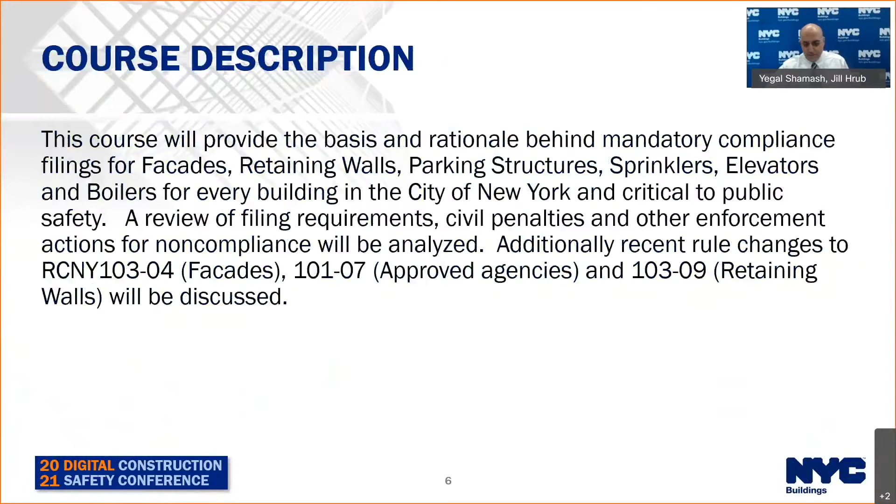Course description, everything that I just spoke about, learning objectives, and as I said, I'm going to start talking about facades.

A lot of you have heard me speak in the past about facades. For those of you who have been around for a while, you know facades as FISP, Local Law 10, or Local Law 10 of 1980 to be exact, or Local Law 11, Local Law 11 of 1998. In-house, we just refer to it as FISP, Facade Inspection Safety Program.

The staff we have in the FISP unit is really very specialized, and we have been trying very hard to retain professionals in the facade unit and hire inspectors with background specifically in facades. We go through a very specialized training regimen within the unit to make sure everybody has a specific baseline when it comes to understanding facades.

In cycle 9, we have about 16,000 buildings. For those who have heard me speak before, that's up from 14,500 in cycle 8. Every cycle we add new buildings to the universe, and that's where the additional 1,500 buildings have come into cycle 9.

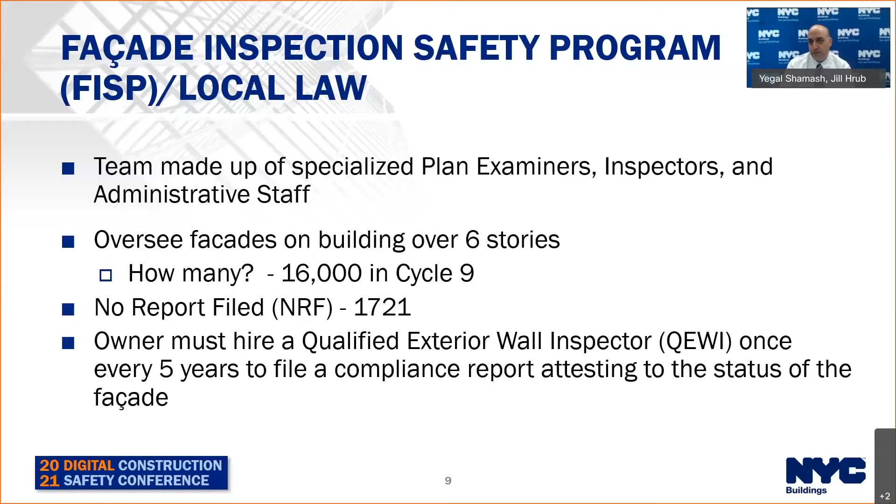So we'll go through a little bit of the history with regards to why we have this compliance reporting for facades. Often tragedies, unfortunately, lead to revisions to the rule or an expansion of DOB's enforcement capabilities. A lot of you are familiar with the history.

In 1979, unfortunately, a young college student, Grace Gold, got hit by a piece of terracotta and tragically passed away. Local Law 10 of 1980 got passed, and Cycle 1 started at that time.

Then Local Law 11 of '98 was a direct result of a collapse. Thankfully, no fatalities, but there's a video of this - you can Google it, and I believe Olga and Claudia showed the video in the FISP presentation earlier this week - of the collapse at 540 Madison.

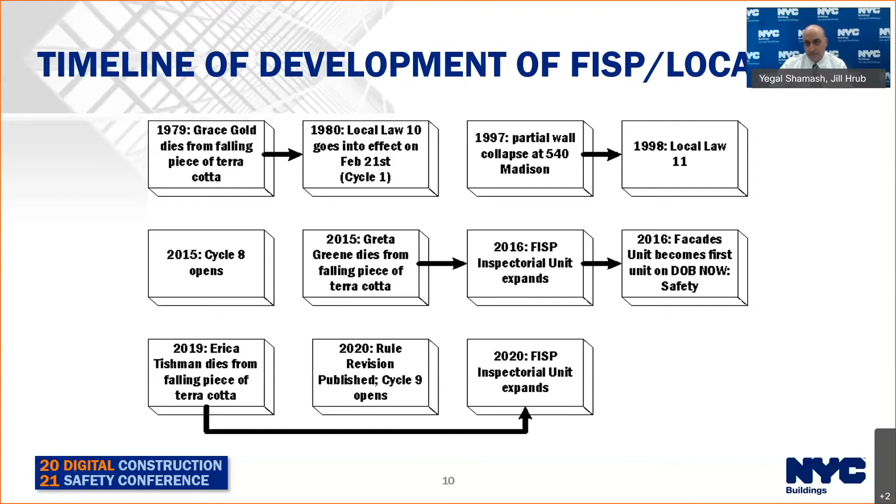So as I mentioned, buildings over 6 stories are included - 6 plus a basement, but not a cellar. Then we have the critical examination, which we'll get into in a minute. We have the 5-year cycle and the sub-cycles associated with that, the A's, B's, and C's, which are based on the block.

Section 101-07 covers approved agencies, and that specifically goes over the requirements on how to become a QE. 101-07 was also changed in 2020, which increased the number of relevant years of experience a QE must have, and that applies to new QEs. So all the old QEs are grandfathered in with their relevant experience and performance evaluations, but any new QEs must meet the new requirements.

One thing to note, though, is that we do list responsibilities of a QE, and that applies to new and old QEs. So everyone moving forward has to meet the new responsibilities.

One thing I'd like to point out is we have a great FAQ on our website now. It's been up for a little while, and we've modified it here and there based on additional questions the industry has been posing to us. We have some nice sketches about drop locations - we get a lot of questions about that. So please take a look at the FAQ.

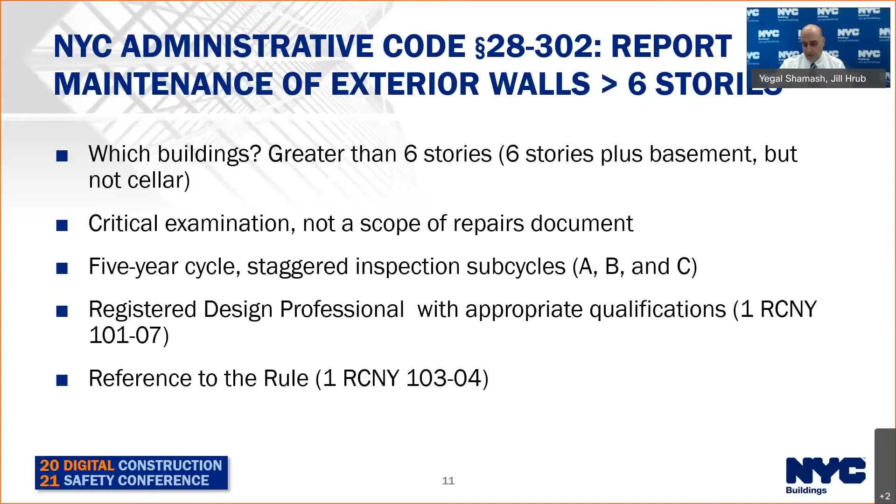So the critical examination, like I mentioned, is not just an inspection program. Obviously, the inspection is the primary part of the critical examination, but there are some things that you need to consider, and I'll say must consider, before you even do your inspections.

You have to review the previous FISP reports. You have to understand the maintenance history on the building. What were the previous reports saying about the building? Was it safe? Was it unsafe? And do a general history on the building: what type of permits, what type of alterations. If you have a good sense of the history on the building...

...it'll lead you to understand what type of inspections and where on the building. Do you need to do more than the minimum hands-on inspections? Do you need to target those hands-on inspections in specific areas of the building? Knowing the history on the building will allow you to not only do your inspections, but do them in a manner that will allow you to gain more information than just saying, I'm going to do the bare minimum number of drops.

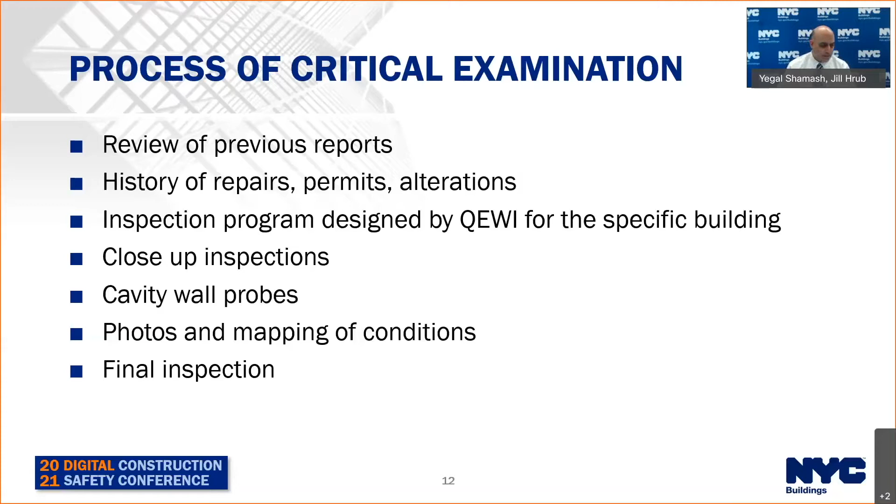And yes, the inspections are the key component of the critical examination, but then it's the follow-up: the photos and the mapping of the conditions, and we'll talk about mapping in a bit, and then it's the final inspection.

So, quick summary of the rule. The law for facades is 28-302. And specifically when it comes to unsafes, the law talks very specifically with regards to the reporting of the unsafes.

We need to be notified immediately of any unsafe condition that's observed, by owners or professionals. The repairs should begin right away, if possible, but certainly public protection needs to be installed right away. And the law says that the repairs need to be completed within 90 days, or if you can't complete that within 90 days, then you need to submit extensions.

So there are initial inspections, then initial extension requests, and then additional extension requests. And I have to point out that you have to make sure that you're submitting your extensions every 90 days if you have not completed your repairs and are ready to submit an amended report.

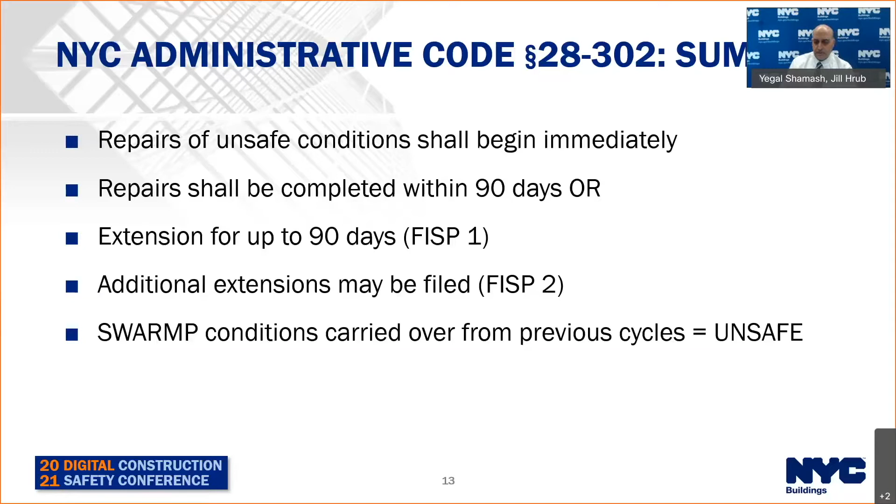So as I mentioned, unsafe conditions, you have to call it in right away, and that can be 311 or 911 if you think it's an emergency situation. You should certainly file the unsafe notification or the FISP3 form, and that can be done by any professional. You don't have to be a QE to file that, and you don't have to be affiliated with the building. That can be filed at any time. And then the extensions, and then the amended report.

Building owners are also required to report unsafe conditions by code, and then the public protection goes up. That has to be immediate. Make sure you're getting those extensions in every 90 days. That's important.

When we talk about public protection, we always see sidewalk sheds as the go-to. But you can fence or close off an area, that's also public protection. You can remove the unsafe condition, or you can net. So all of those are forms of public protection.

What leads to the public protection? Most of the time, not all the time, but it's an owner's lack of maintenance that leads to the public protection. Plain and simple. It's the owner that is causing the installation of the public protection.

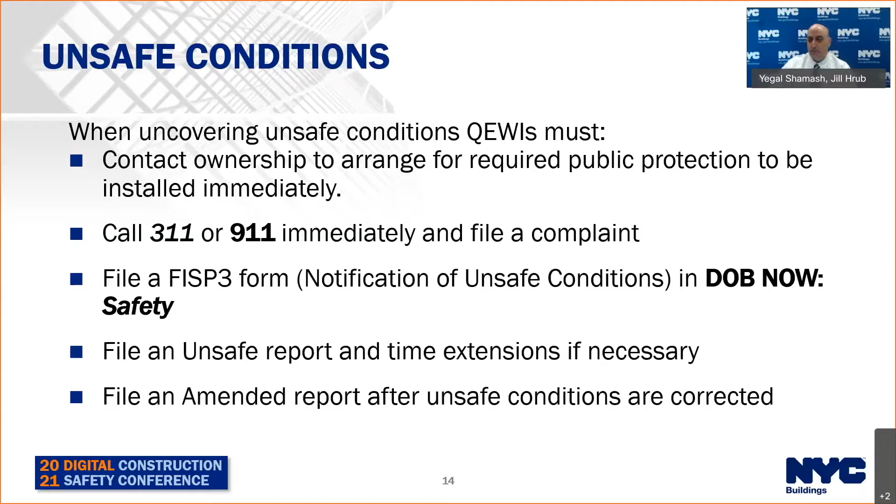So we'll go real quickly through the 3 different statuses a report can be filed. Safe, we like that. We like when a building is filed safe, as long as it truly is safe, first and foremost. Our inspectors, we now have 16 of them in the facades unit, and they are now inspecting safes and SWARMPs.

When I first joined the department, gosh, almost 7 years ago now, hard for me to actually believe I've been here 7 years. But we did very few safe and SWARMP inspections when I first started, and we realized, unfortunately, that sometimes we just can't take these reports for granted, and maybe the safe is not necessarily safe.

But the expectation with safe is that basically no repairs are going to need to happen on that building for a minimum of 5 years into the next cycle. Is it possible that some maintenance needs to happen? Sure, that's certainly a possibility, but no repairs. It's 5+ years that's the expectation.

SWARMP to us, or Safe with a Repair and Maintenance Program, yet another acronym that we like to throw out there in the facade world, is in our mind a precursor for a facade repair program.

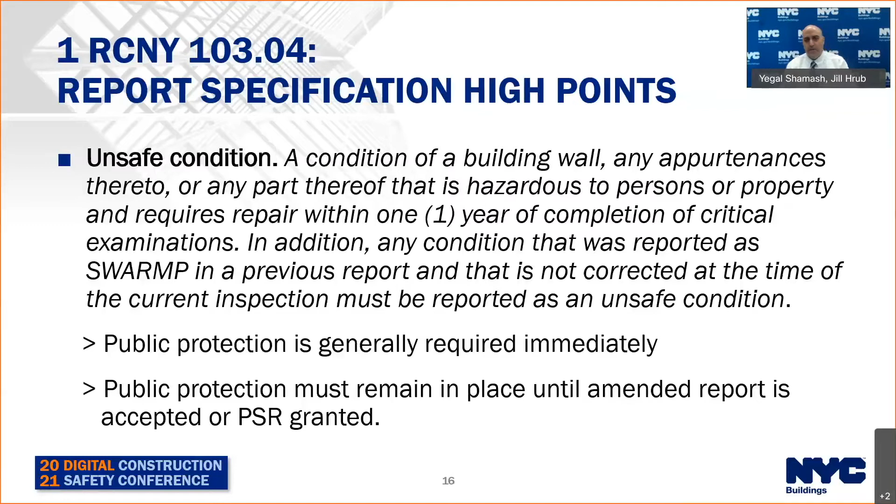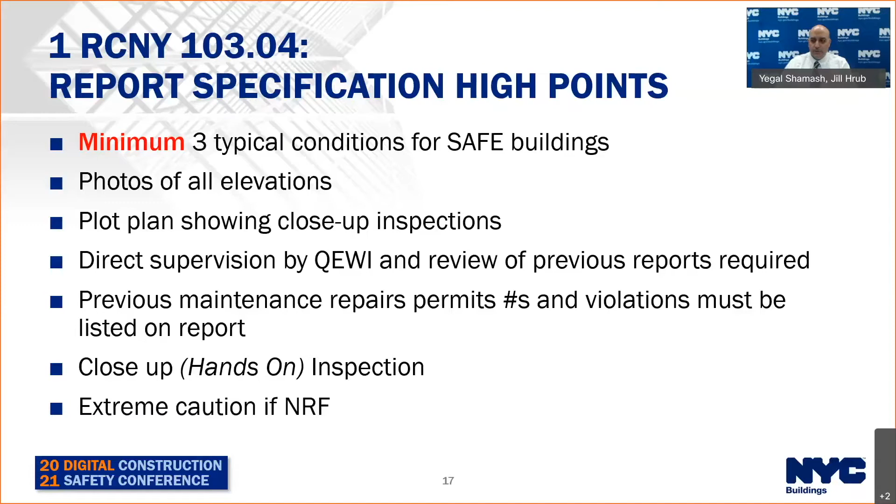So we'll get into the reports themselves, and some highlights of the reports listed there. The QE can do the inspections themselves, or they can have somebody delegate that on their end, but they always have to supervise the work. The expectation is that the QE is ultimately responsible for the report and what's in it, most importantly, and that's critical for us. So the rule does allow for the QE to delegate the inspections, but at the end of the day, the QE is the one signing and sealing the report, and those are the folks we're going to hold responsible for the reports.

Now we'll get into the rule revisions we had in 2020, and there were a lot of them. We're just going to highlight the major ones, but please go through and read the rule yourself. It's pretty dense and has a lot of information.

And why did we make the rule changes? I mentioned it before - there was a fatality on the Upper West Side, and then one in Times Square. And we said, well, we need to raise the bar on the minimum standards for both owners and professionals. So a lot of people think we were just raising the bar on the reports, but it's not just that. The expectations from owners, while not directly indicated in the report - a lot of the rule changes we made were very specific with regards to owners.

Plain and simply, we were trying to enhance public safety with the rule revisions. We're trying to push owners and professionals to make repairs that last multiple cycles. Many of the costs associated with doing facade work is just getting to the area to do the work. Again, we're talking about buildings over 6 stories, so we're talking about pipe scaffolding, hanging scaffolds. It's expensive to get to these locations to do this work, and then the general conditions associated with all of that - that is the majority of the costs for doing a lot of the work.

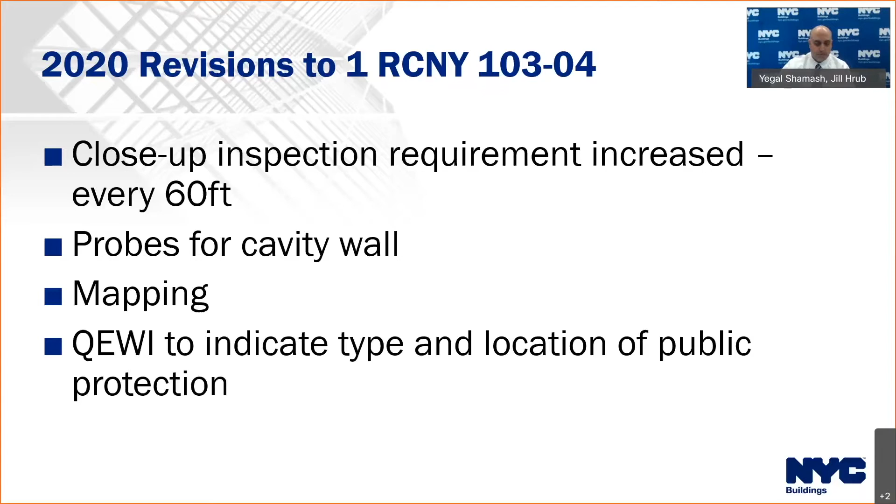So the biggest change, and I think most people will agree with this, is the requirement for the hands-on inspections. Not only did we specify an increase in the number of hands-on inspections and specify a specific distance, but previously the rule only had a drop along one street face. We changed that to fronting the public right of way.

And I know there's been a large amount of questions with what does that mean specifically, and we've discussed this numerous times. The public right of way for us is defined in the rule, and it's very specific - if I'm walking along the sidewalk and I can walk off the sidewalk onto either the private property or directly up to the facade, and walk up to that building elevation, that's the public right of way. I'm not associated with the building, and if I can walk right up to that facade, even if it's on private property, that's the public right of way for us.

It's important to understand that and make sure that the drops you outline with regards to the compliance reporting take that into account. Something we ask is that the drops are evenly distributed along the various elevations along the public right of way. I'll refer you to the FAQs again on our website - we have sketches of not-your-standard buildings that talk about what's public right of way, and talk about how you break up the 60 feet in terms of how you add up which elevations you need to add up, and how you can distribute those drops. So again, please take a look at the FAQs.

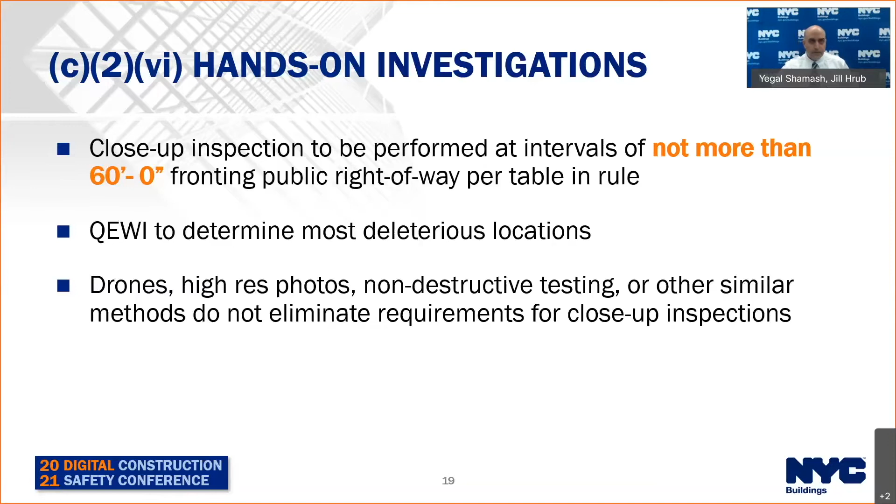And we talk about probes and cavity walls. And why did we require probes and cavity walls in the most recent rule change? We had numerous failures with cavity walls. Cavity wall construction, for those of you that are not familiar, became very, very popular post-World War II. Specifically in the late 50s, early 60s, it came to be the most commonly installed facade type in the city.

And if you heard me talk in the past, our top three issues were cavity walls, terracotta repairs, and glass. I hope everybody listened to Olga and Claudia's presentation from earlier in the week. Unfortunately, we're adding a fourth item to our list. We've had a rash of failures when it comes to EIFS, or EIFS, depending on how you like to pronounce that.

So we're looking at what we can do with all of these failures, and specifically in cavity walls, most of the failures stem from lack of ties or just the ties that were installed in the 50s and 60s have no protection. They were basic metal, no galvanization, no stainless steel, just carbon steel, and they're corroded right now. Right, they've lasted their lifespan has expired.

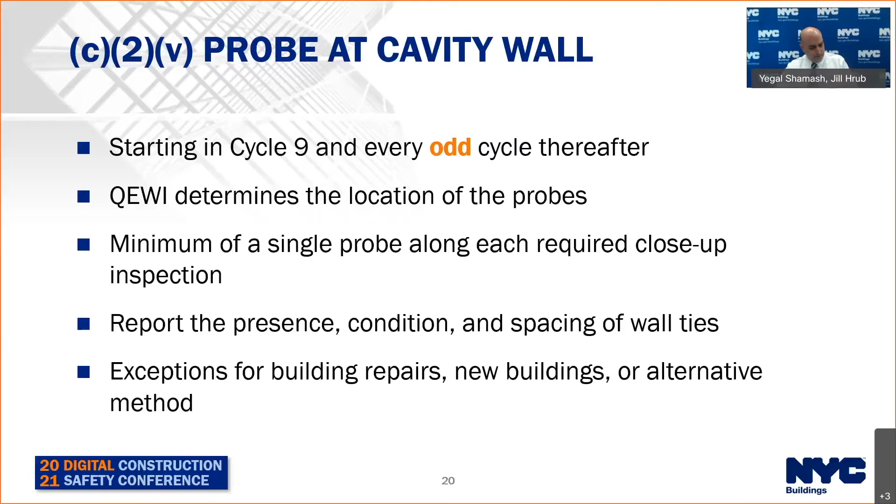And then do we need a permit for probes? So 1 RCNY 101-14 outlines permitting requirements, and most of the probes that we're talking about here would fall under minor work and don't require a permit. So please take a look at 101-14. It has very specific requirements on what needs a permit and what doesn't, and it should be fairly clear.

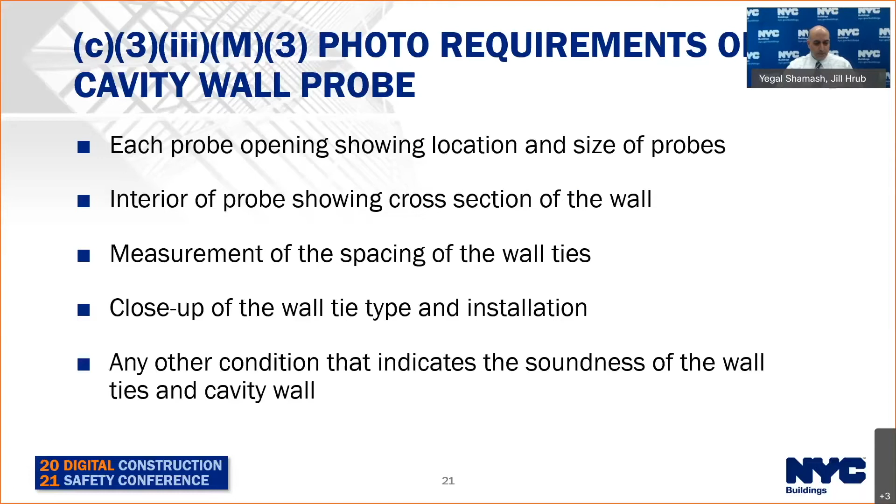Photo requirements of cavity wall probes. We want to make sure that we're getting the information in the reports and ensure that the probes are being done. And then mapping.

So I love the mapping picture that we always have, and if you notice, we changed it specifically for this Build Safe, Live Safe presentation. I was joking with Claudia and Olga that they took my 3D rendering away and put this one in, but this is also a fun picture that shows what we're talking about with the mapping. It's a one-word change that we made in the rule, but the expectation is that you document all the conditions that you observe during your inspections on an elevation, on marked up photographs, or a combination. We just want it to be clear where all the conditions observed are.

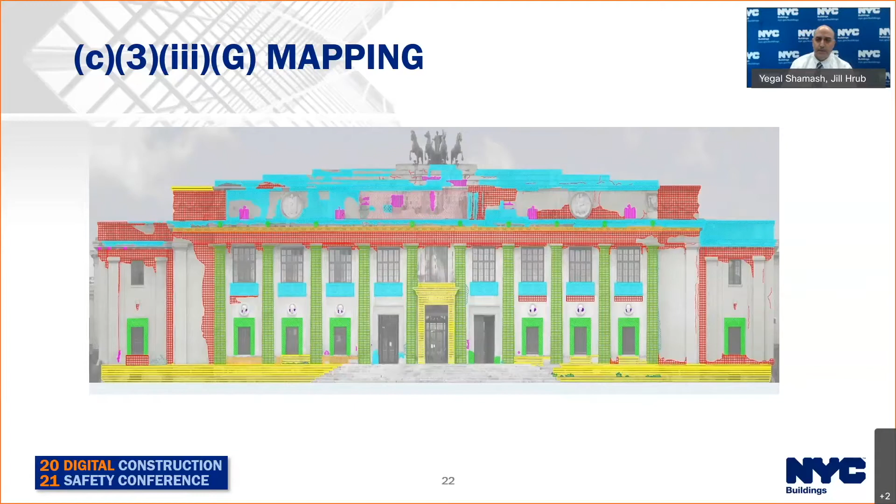For a multitude of reasons. Number one, so we know where all the conditions are. But when cycle 10 happens and we look back at the cycle 9 report, we can compare. You can compare, we can compare, and we can see what exactly has transpired.

Unsafe timeframes. Previously, we only had a requirement for SWARMP timeframes, and now we're asking for unsafe timeframes as well. This is in an effort to hopefully minimize public protection that's out there, limiting owners from filing unsafes repeatedly from cycle to cycle. Once that unsafe timeframe has expired, you will not be able to file extensions anymore, and civil penalties will start accruing. So it's very important that we take these unsafes very seriously and that owners do the repairs.

And what we're talking about with the repairs, as I mentioned before, and specifically we talk about this in the revised rule, is the repeated SWARMP conditions is a problem for us. Don't do the caulk repair. Fix the condition correctly the first time, because we're checking whether or not the SWARMP conditions are repeating from cycle to cycle.

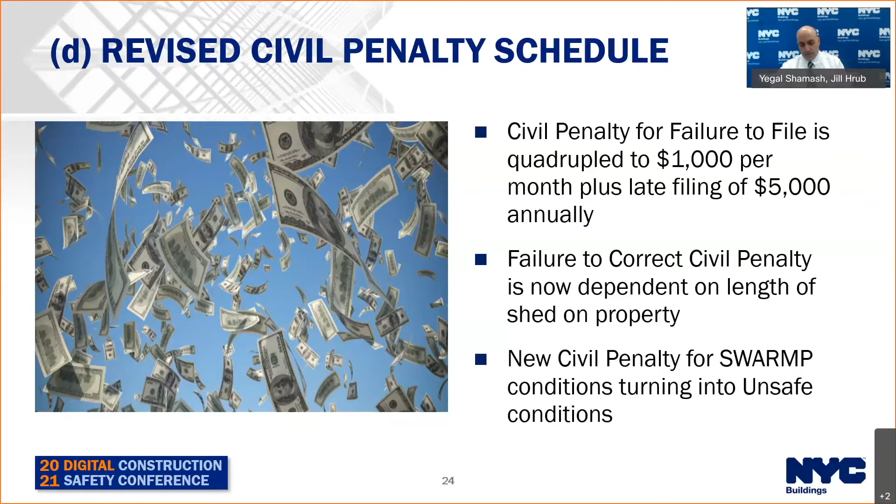And then the posting of the conditions certificate. This is all about making the condition of the building publicly available. It is on DOB Now, but specifically we want the tenants of the building to know exactly what the conditions of the building are. So we want those posted, and make sure that the conditions certificate, you go on there, you print them out, and make sure that it's posted right now.

There was some misunderstandings with the way the rule is written, but the way the rule is written is all buildings, whether you have filed your Cycle 9 report or not, need to have a condition certificate posted. And our inspectors are looking for those condition certificates, so please make sure you post those.

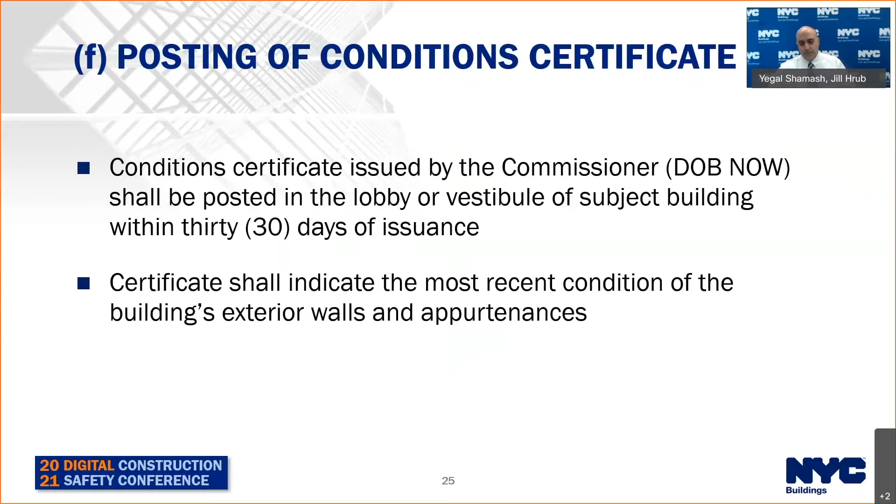Okay, so that's it for facades. I'm going to go on to sprinklers, and I'll spend a little bit less time on sprinklers, and then Jill will take over. You guys have heard me ramble on enough, so you can hear somebody else in a couple minutes here.

But sprinklers, and specifically Local Law 26 of 04. So the Department of Buildings convened a World Trade Center Building Code Task Force in March of 2002, and that was a direct result of the events of 9/11. That task force outlined a whole list of recommendations in early 2003, February 2003. And then our former mayor, Michael Bloomberg, on June 24th, 2004, signed the majority of those recommendations into law. And a lot of those, specifically 3 of those, became Local Law 26 of 2004. And one of those is the requirements for office buildings over 100 feet in height to have sprinklers.

And so yes, this law does go back to 2004. It's one of the few laws that is retroactive to all buildings. So most of the time when we pass a law, we specifically draw the line in the sand, and everything moving forward needs to comply with that law. That's not the case here. And the reason why this was given such a long time frame to come into compliance is because this is retroactive to all buildings. And we'll get into some specific exemptions and all that.

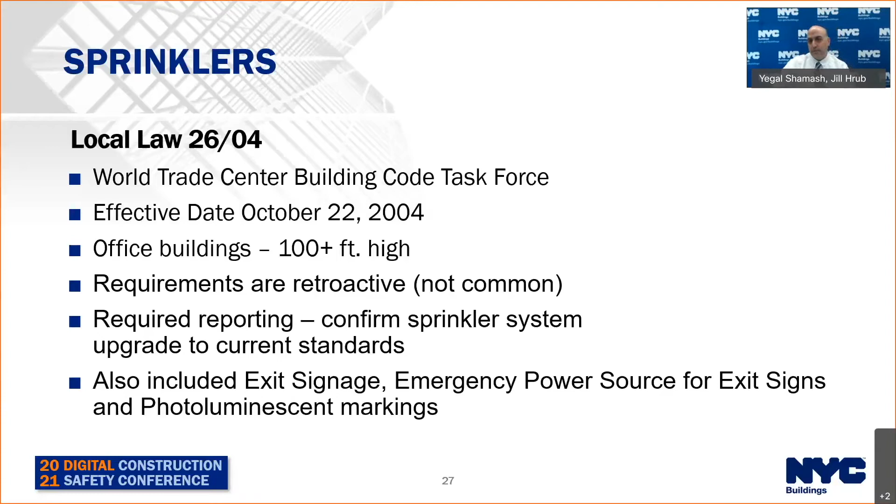And the sprinklers in office buildings, in my understanding, it's twofold. Number one, people in office buildings don't specifically know exactly where the egress pathways or the emergency exits are in buildings. You know, they're not specifically living in those buildings. And then office buildings can have a high number of people in them as compared to residential buildings.

So that local law added section 27-929.1 into the building code, into the '68 building code, which required, as I said, office buildings over 100 feet needing to be sprinklered.

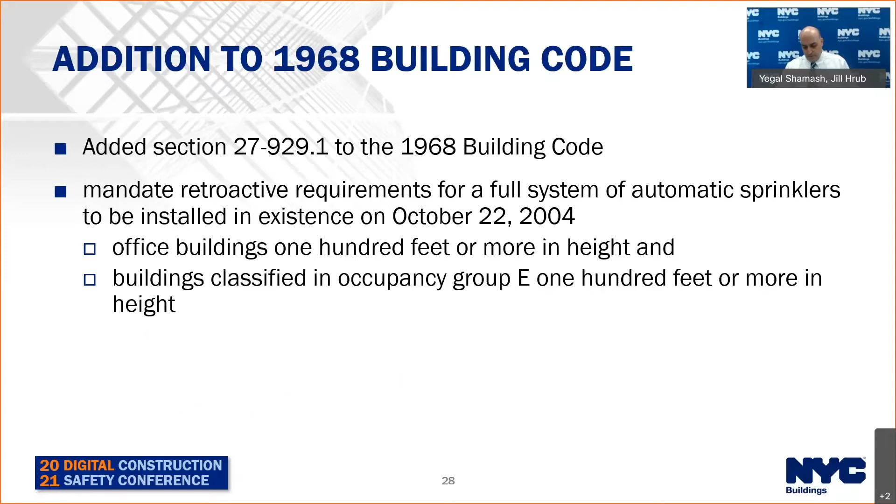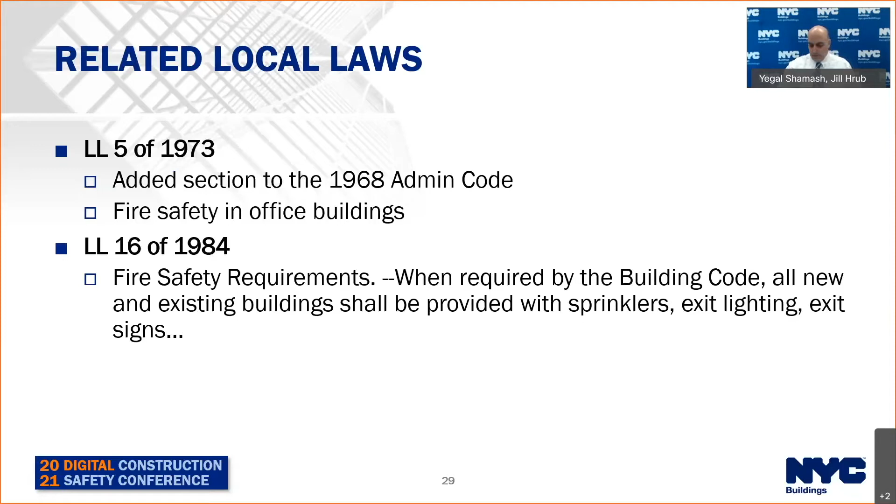Going back in time a little bit, there were two local laws prior to 2004 that were issued. Specifically, Local Law 16 of '84 required buildings to have sprinklers, exit lighting, and exit signs, and that was a line in the sand, as we like to call it, for a lot of office buildings.

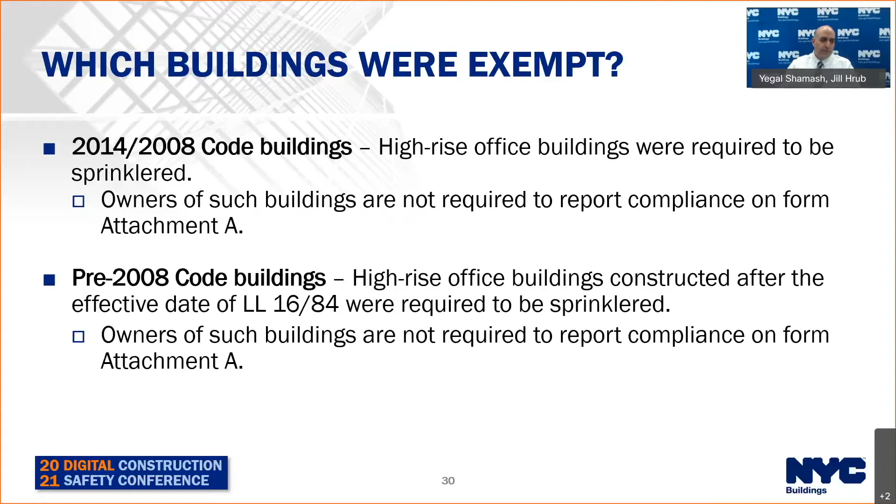So what buildings are exempt? I mentioned Local Law 16 of '84. Anything that was permitted after that local law, specifically high-rise office buildings, and continuing on in the 2008 and 2014 code, would have had sprinklers. It was a requirement since '84, and therefore any buildings permitted after that are exempt from the reporting requirements because we know they have sprinklers in them.

If a building was pre-1984 and had sprinklers installed and signed off before the effective date of the local law, then those buildings simply need to file what we refer to as Attachment A in terms of the reporting requirements.

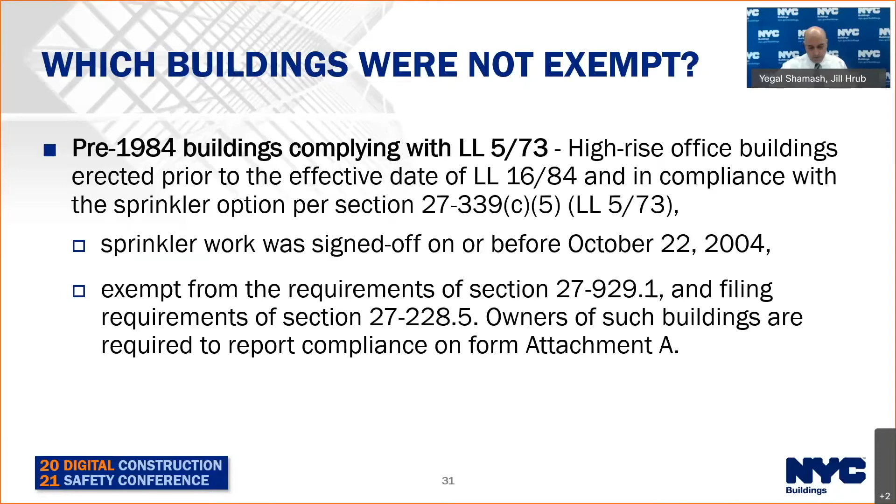One thing I'll note is the sprinkler page. You can simply go to the department's website and search for LL 26/04. We have a long list of FAQs on there, and there's a nice bulletin that we reference as well that goes through this very specifically with a nice flow chart. Please take a look at those FAQs.

Lastly, if the building was pre-'84 but did not elect to install sprinklers, those are the buildings that need to install their sprinklers and comply with the full reporting requirement of the new local law. One thing to note: extensions were eligible, but that has come and gone, so there are no more extensions allowed.

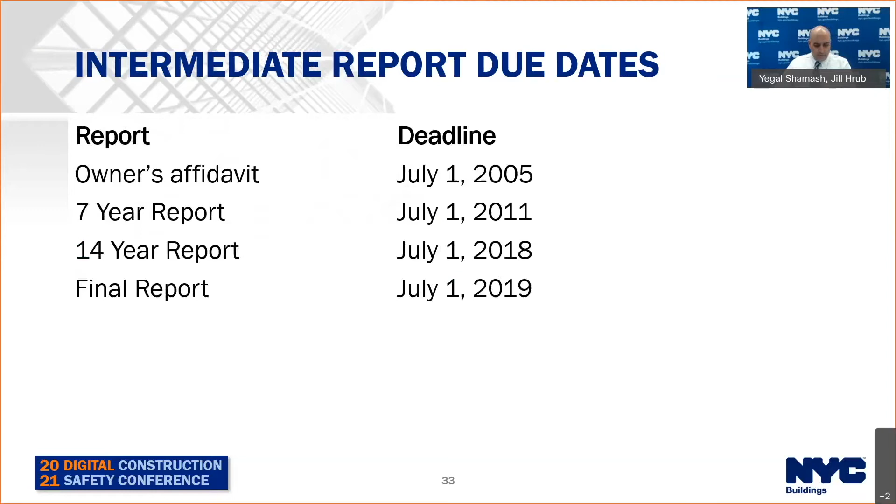This was started in 2004. We had three interim reports that were required, and then the final report. Here we are almost two years later, and the final report was due, and we still have 381 buildings that have not filed the report. So 17 years later, and two years past the deadline, we still have non-compliance and a large number of buildings that are non-compliant with this critical public safety issue.

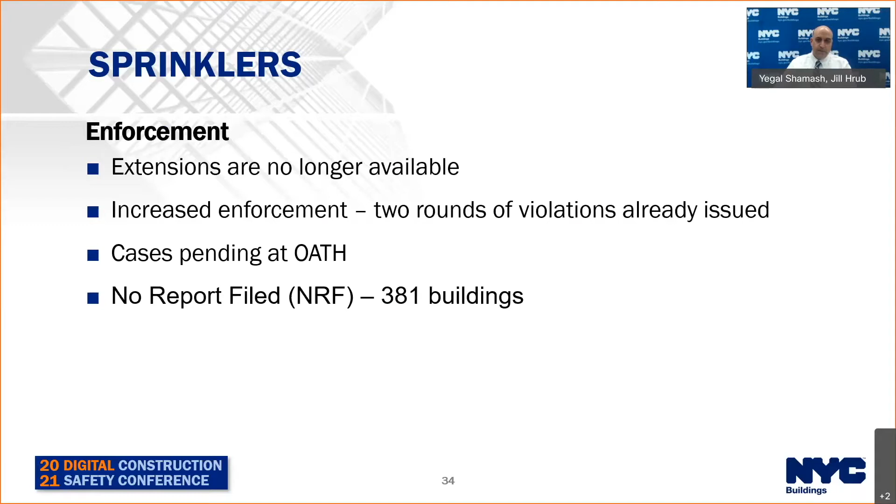So with everything today, please help us reach out to owners, to professionals, to everybody, so they're aware of these critical public safety compliance reporting issues, and let's make the city a better and safer place for everyone.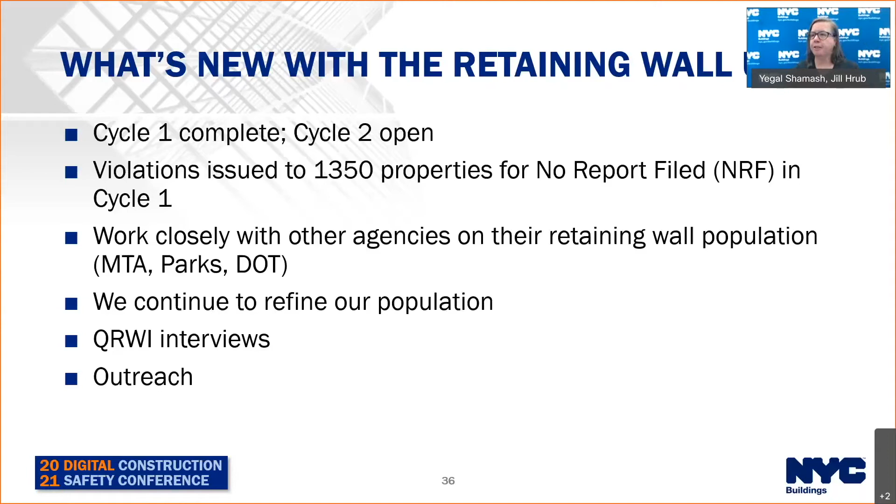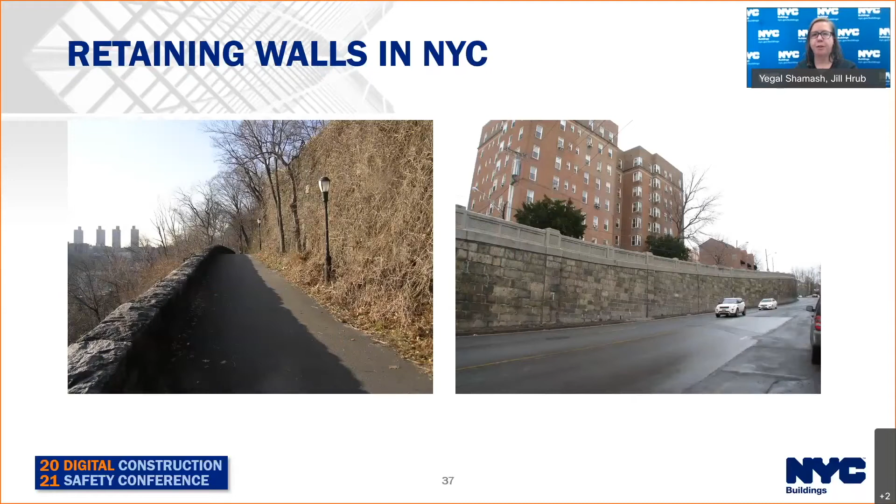So what are we talking about? These are some retaining walls. On the previous slide, we mentioned that we work with public agencies. A lot of these retaining walls are under the jurisdiction of other agencies - MTA, parks, DOT - and we are working with them as well. So it's not just the private owners we're working with, it's also the other public agencies.

And like I said, I'll go through this pretty quickly. History of code ownership: basically through 1855, 1916, there was this concept of who owns the wall. There's the high side, there's the low side. They both benefit, but somebody is causing it - if I decide to put my property on a lower space or a higher space, I need to put a wall.

And the ownership kind of changed over the years. And the reason why that's important is because, as you saw on the previous slides, we issue violations, right? Notice of violations saying that you have to file with us. So whose responsibility is it? That's why this ownership becomes an issue.

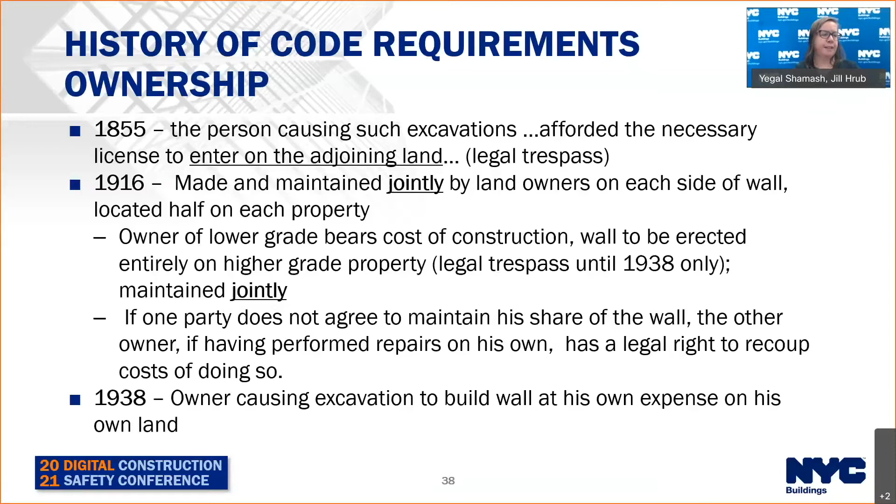I would recommend, if you think you are dealing with a retaining wall that needs to file with us, go over the ownership issues and see who's actually responsible.

Obviously, the maintenance and engineering has changed over the years as we've become more knowledgeable. It's gone from being very prescriptive, basically if you have a 4-foot high wall, you need a 1-foot minimum bottom, 20-foot high wall, 5-foot minimum at the base, to actually doing analysis with earthquake loads, lateral loads, sliding, overturning - more like, it's gone from prescriptive to engineering. But most of the walls we deal with do fall into this 1899, 1916 kind of era for the most part.

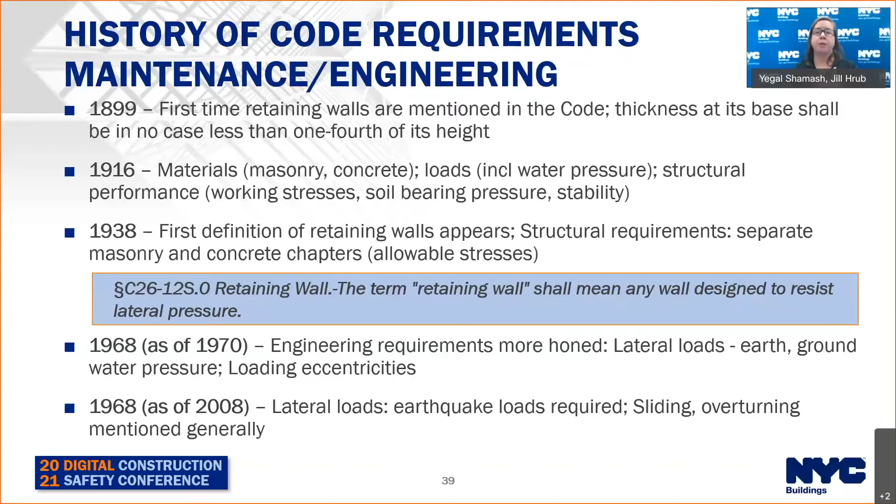As we always mention, if you've heard Yegal and I present, or anybody on our team, 301.1, just because you don't have to file with us does not mean that you don't have to maintain your building or your structure. And that's what I like to include with the retaining walls. We are the building department, but it does constitute structures as well. So all buildings and all parts thereof, and all structures, like a retaining wall, you need to maintain it safe.

So yeah, Local Law 37 came out in 2008. Again, 10 feet high, facing public right of way. Similar to FISP, you have to do it every 5 years with a qualified retaining wall inspector. You submit the report, we review it, we accept it, we reject it, depending on, because there's a minimum amount of things we want to see, which I'll go over in a bit.

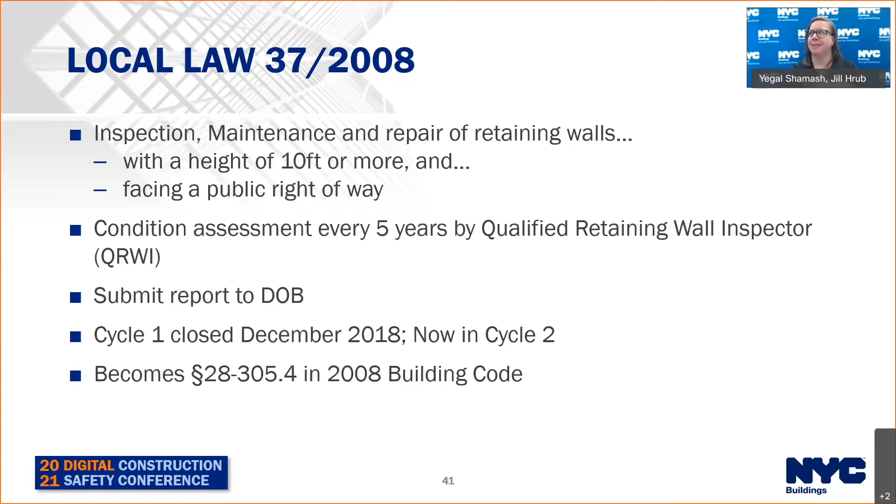And again, this local law, like what happens to a lot of local laws, it becomes folded into the building code. So this became section 28-305.4. I believe the third chapter of the administrative code is the compliance filings. You have 302, which is facades, 305 is retaining walls, 323, which I will talk about, which you don't know about yet because it's just being reviewed by these guys across the street at City Council and whatnot - now will be parking structures, which I'll talk about. And I believe Antonio's elevators and boilers also falls into chapter 3. So he'll talk about that.

So yeah, reporting requirements as promised. Again, similar to FISP, we want the general information, the property owner, property profile, how was the condition assessment performed, what was done, were there any probes done, what kind of calculations were done. We want to see a cross section. We want to know that the QRWI has done an adequate investigation and assessment. We want to see an analysis. We want to see numbers. What's the factor of safety?

It's again, similar to - you're going to hear me say this a lot - similar to FISP. FISP has been around for 41 years. Retaining walls, I guess 12 years now, 13 years. Parking structures is going to be new, but they do have similar underlying requirements.

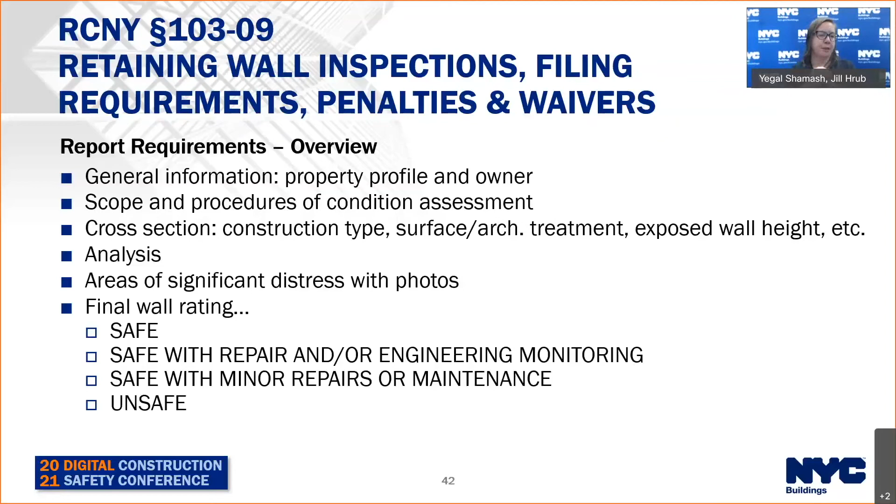So if there's areas of distress in the retaining wall, take photos of it. And then of course the final rating. You have your safe on one side, you have your unsafe on the other. And then with retaining walls, in between, we have safe with repair and or engineering monitoring, and safe with minor repairs or maintenance. So we kind of break it up into two categories. And I'll talk a little bit about the engineering monitoring later.

So here we are, safe with repair and engineering monitoring. What is a monitoring program? I don't know how many times we get letters saying, oh, we recommend monitoring. Okay, that's nice, what is that monitoring? What does that constitute? What does that consist of? Who is doing the monitoring? We want specifics, because we want to know that this is being thought about, that this wall is being addressed, especially if it falls into these sort of middle categories.

Stability analysis, as I mentioned, with the factor of safety. And especially, this is kind of crucial with these two categories, because we want to know what is that factor of safety that prevents it from being unsafe. It's pretty important. And then minor repairs or maintenance, what's the time frame? And then, again, similar to FISP, unacceptable time frames - ASAP, less than a year, immediately - because then that would be unsafe.

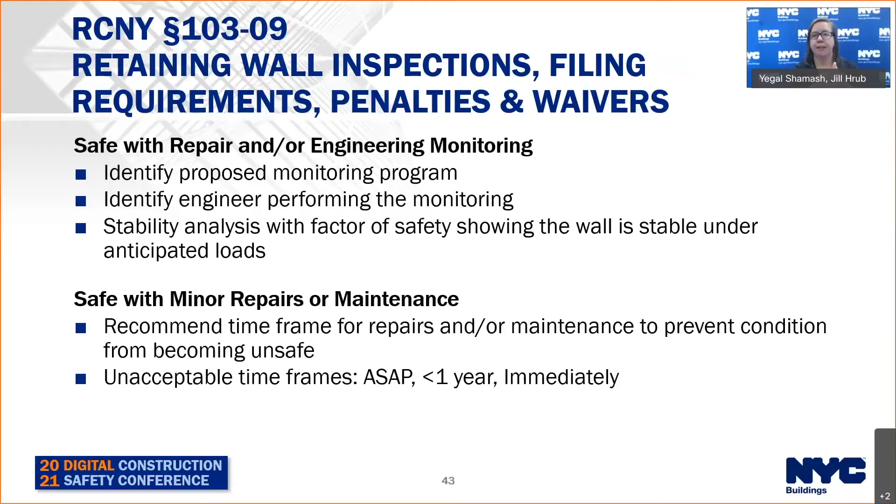If unsafe, the owner has to commence repairs immediately, or else at the very minimum take measures to protect the public. This could take the form of cordoning off certain areas, limiting access, building a construction fence, whatever, basically so people can't get to the collapse zone of this unsafe wall. Call 311, obviously if it's an incident, if something has actually already collapsed, call 911. But call 311 and then email us.

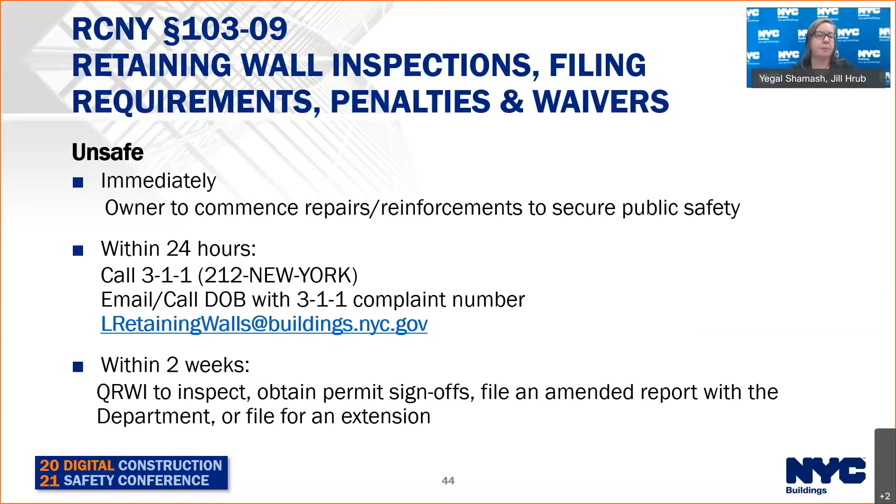You can see the email address is there. Within 2 weeks, get the QRWI to reinspect. And then once the permits are signed off, we realize not all repairs can be done in 2 weeks, but similarly, file for extensions, and then eventually file an amended report correcting that unsafe condition.

This is the form. What I'll briefly highlight, and again similar to FISP, two things here: there's two people that have to sign, the QRWI and the owner. Basically the QRWI is attesting that they have provided this report to the owner, and the owner is attesting to the fact that they have read the report and understand any required repairs.

This is very important for us, so this way an owner can't say to us, 'Oh, I didn't know.' They're literally signing their name saying that they've read the report. So this is important.

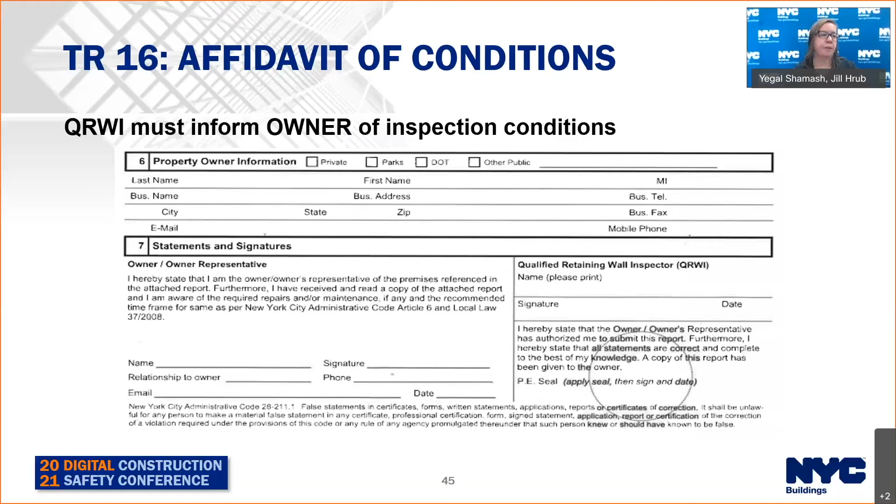Fee structure: initial, amended, extensions, fees attached with that. I don't think these have been updated recently, so these may go up. I don't know, don't quote me.

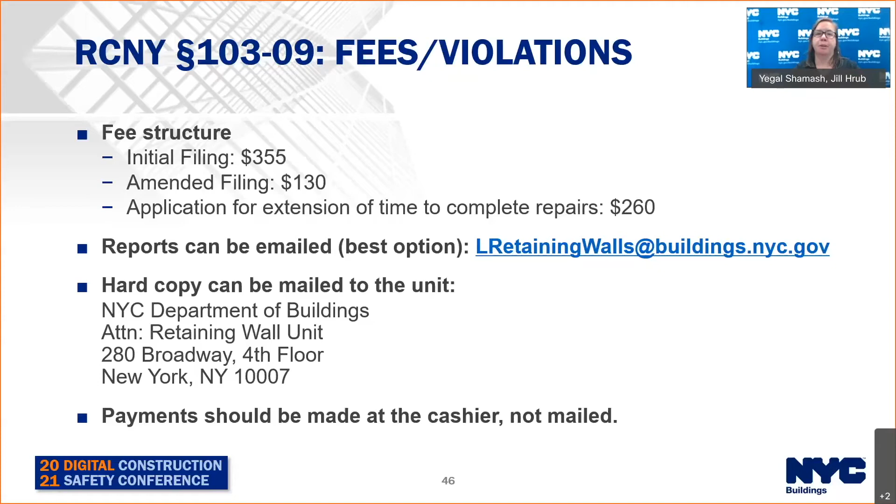And then, of course, we're not on DOB NOW yet. I don't know if that's good or bad news to you guys, but we're not on DOB NOW. Eventually we'll get there, I'm not sure what the time frame is on that, but we are accepting, obviously in these COVID times not in person, but you can email. We prefer the email, or you can mail it to us. But email is definitely preferred, and this email box is monitored by a few people pretty regularly, so it shouldn't get lost.

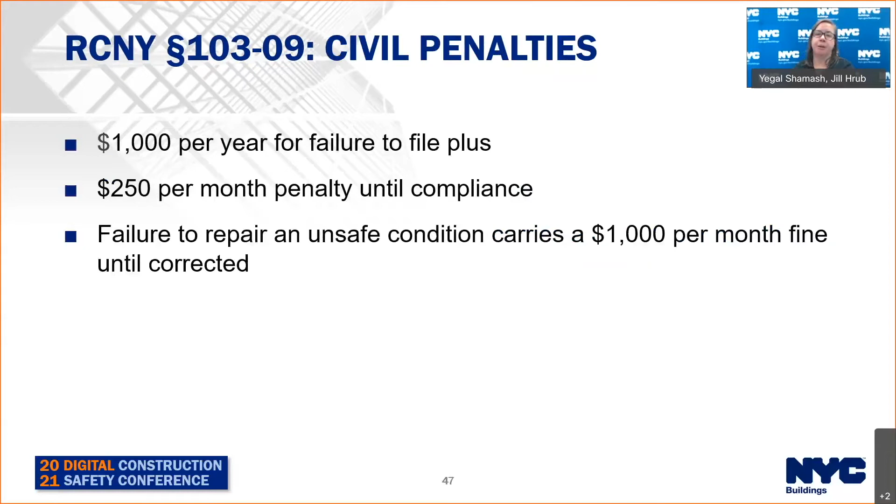Civil penalties again kind of mirror what the old facade penalties were: $1,000 per year for failure to file, $250 per month until compliance, and then failure to repair an unsafe condition, $1,000 per month.

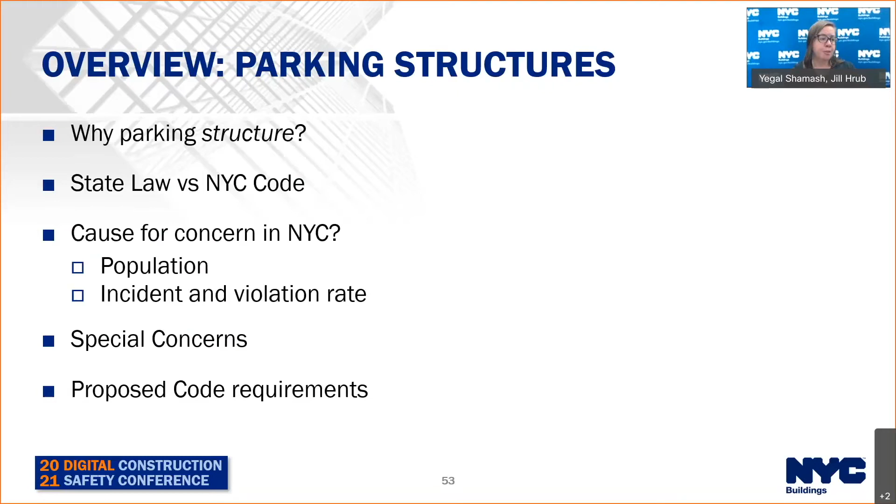And then we're going to go over the proposed code requirements and talk a little bit about the associated rule, because as you know, in FISP you have code 302, rule 10304 for retaining walls, code 305, rule 10309 for parking structures, code 323.

Rule 103-13, I believe, is what we're drafting. And I always put it that the code tells you what you have to do, the rule tells you how you should do it. So the code is you have to file a report with us. The rule is the report needs to have X number of photographs, so on and so forth.

The locations we're concerned with fall into different categories: detached, the basement of a residential building, sometimes on the roof, which can be hard to find. There are different materials here in New York City—a lot of reinforced concrete, that's kind of the standard, but some steel, and we've even had some wood parking structures. These materials degrade at a different rate, and they also degrade differently under a vehicle load than just an office or residential load, obviously.

How many levels? Ownership. Ownership is tricky because, again, with the commercial structures, often the parking structure will lease out from the building or the condo owner or whatever. So then it becomes whose responsibility is it? We've presented to ownership groups, and I think we're going to present to a group that represents the parking association or whatever. So that becomes—and this isn't as pertinent for the people on this call—but ownership issues can be tricky, shall we say.

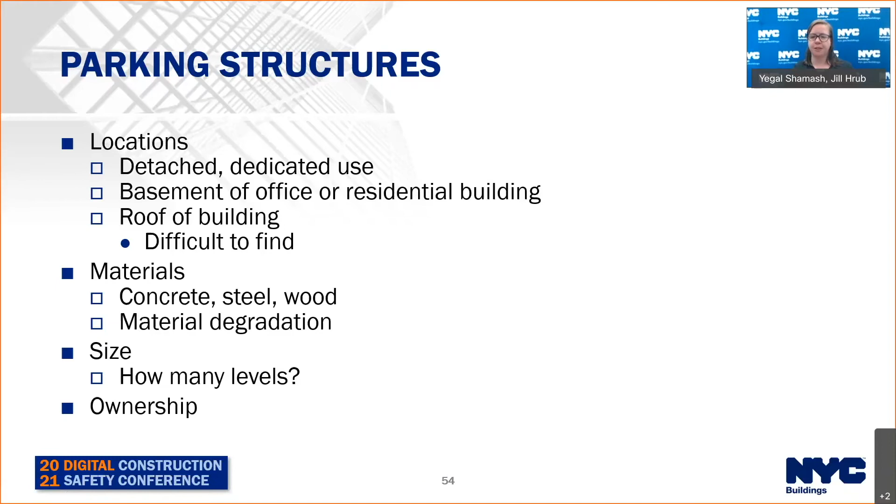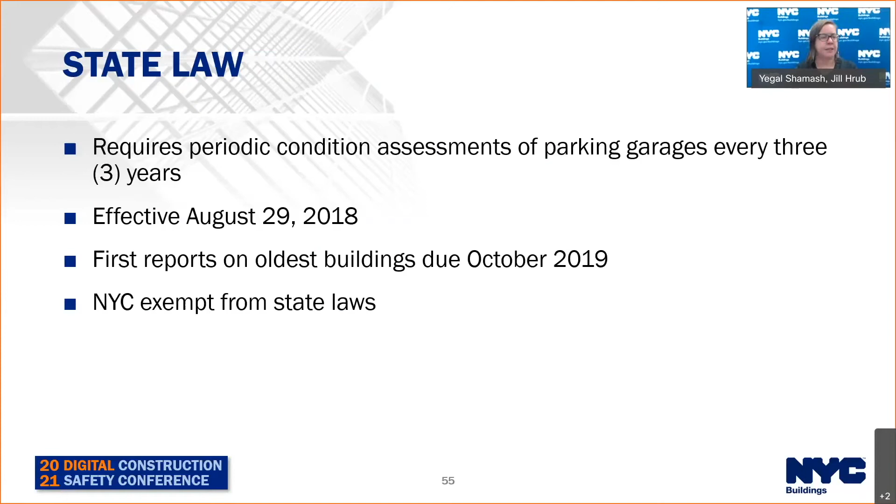So the state law, as I promised I'd talk more about it: periodic condition assessment every 3 years. It became effective about 3 years ago, 2.5 years ago. Again, oldest buildings had to be reported first. And now New York City is exempt from state laws—I'm never 100% clear on this, so don't quote me, but I think it's something like because we're over 1 million people, we have a little bit of autonomy to a certain extent. Obviously not completely, but we can kind of make our way.

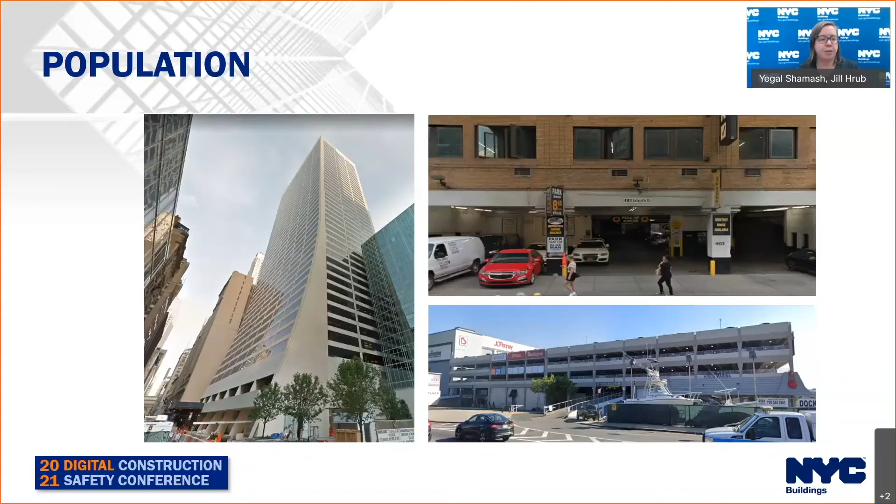If some of you eagle-eyed viewers may remember, I did this presentation, a similar presentation, at a couple different venues, and I said we had 2,100. Well, we're always finding new and creative ways to try and find our population, and we did that—we had our inspectors going out on sweeps related to COVID, and we said, hey, while you're out, why don't you let us know if you see any parking garages? And they did, so we added 700 more garages to our population, which is nice.

And this is our distribution, kind of as to be expected. Manhattan, lion's share. Brooklyn and Queens, similar. Bronx, not as much as Brooklyn and Queens, but still a lot. In Staten Island, we have 30. We may have more—we're still, like I said, always refining our population.

Structures not included: unenclosed, unattached—so basically a parking lot. And then 1 and 2 family parking structures, parking garages, you don't have to file with us, it's fine. But reminder, 28-301.1, you still have to maintain it in a safe condition.

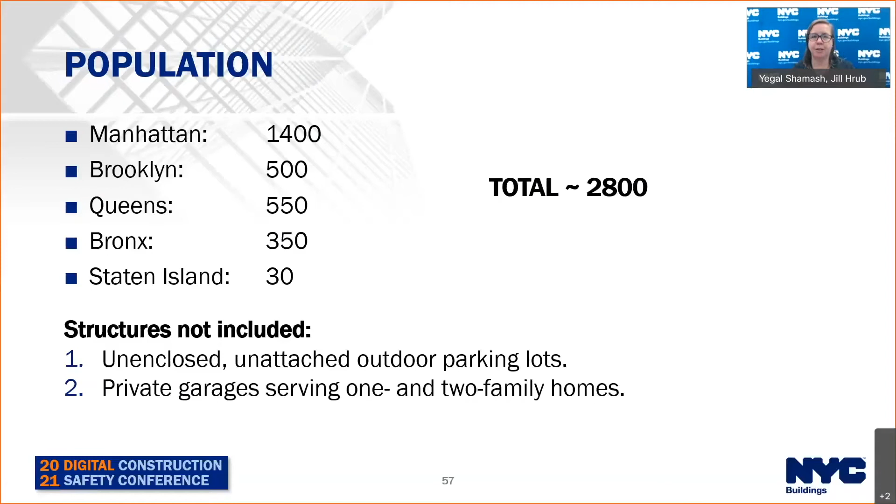Oh yeah, one thing I want to point out - the unenclosed, comma, unattached - that's an 'and,' meaning unenclosed and unattached. So if yours is unenclosed but attached, i.e. it's on a roof or something, it counts. Or if it's enclosed but unattached, it still counts, right? So it's the unenclosed, unattached that is a parking lot, basically. Yes, thank you, you all just confirmed. As soon as I started talking I was like, I'm going to get myself in trouble here.

He bails me out as per usual. So yeah, so what is our distribution?

We ran the numbers, and as of now - this could change as we get more information - but we think this is pretty robust at this point. So you can see they're mostly residential, about 2/3 residential, elevator apartments and other residential. And then garage, standalone garage, 14%.

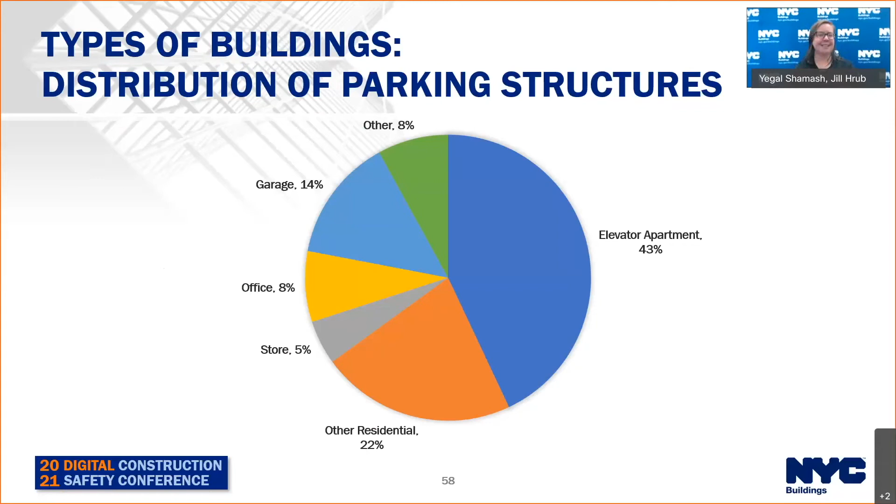Offices, not as many as I was expecting, but still, like with FISP - there's 1.1 million buildings, and you ask people who didn't see Gall's presentation how many FISP buildings there are, like 'oh, 100,000.' It's like, no, it's only 16,000. So, you know, New York - it's a wily creature, shall we say?

Okay, so now the next thing. We have 2,800 structures, right? State law says you have to do this thing.

Is this a problem? As I said, our parking structures are a little different than those upstate. So how do we do it? First we took our population, then said okay, how many class 1 violations do we get per year? We crunch those numbers, we get 10. Okay, well that's not a lot.

But we receive 60 complaints a year. So let's think about this - you have 60 complaints, and of those, you get 10 class 1 violations. Now, class 1 violation is our highest, most hazardous violation. So that means 1 in 6 complaints is getting a class 1 violation. Now the numbers are starting to make sense.

And then we get 2 incidents per year - I'll show you some pictures of incidents in the next couple slides. So basically of 60 complaints, 1 in 30 is an incident. The numbers are pretty severe. I'll talk a little later about why that may be the case. But we determine it is a concern, and it becomes: what do we know about, what don't we know about, and how do we find out what we don't know about?

This was an incident in Staten Island. A nice woman was having her morning coffee, and all of a sudden she heard a pop, and her kitchen floor sank a few inches. Of course she got out of there and called us. We go out, and if you look at the base of that column - it's a steel column, 4-story structure - you can see on the bottom left where the entrance to the garage is, and the column has severely deteriorated. If you get down to ground level, you can actually see right through the column - there's like nothing left. By the time I got there, they had immediately shored it, then repaired the column under permit.

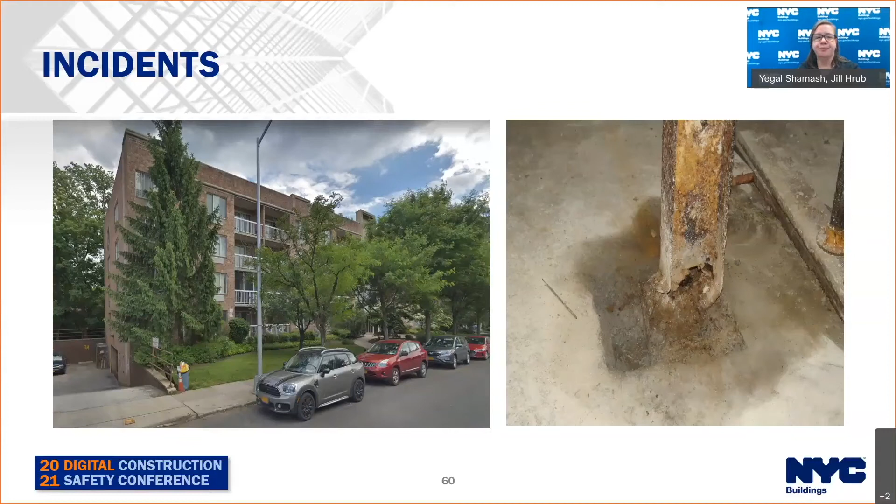But the fact of the matter is, how did it get like this? Nobody was looking. Or if somebody was looking, they didn't have that trained eye to say, oh, this may be a problem. This one is a little more dramatic.

I mean, look at those cars - how many cars? How many people lost their mode of transportation there? There's like 20 cars. And then, of course, how do you fix this? There was talk of opening up the roof and getting a helicopter and all this crazy stuff. I think they ended up just shoring and slowly pulling stuff out.

But yeah, so they did it. The end result is they got all the cars out. They did a partial demo and renovated into a new gym, which sounds great. But then it's like, look at all this parking that's missing.

I personally don't have a car, which is ironic considering I've given this presentation so many times. But I know parking in the city is not easy, both from when I have to take a DOB car home or just go anywhere. So look at all these parking spaces we're now missing because this collapsed, and then they didn't want to rebuild it into another parking structure. So yes, we have a problem, and these are things we need to look at on a regular basis.

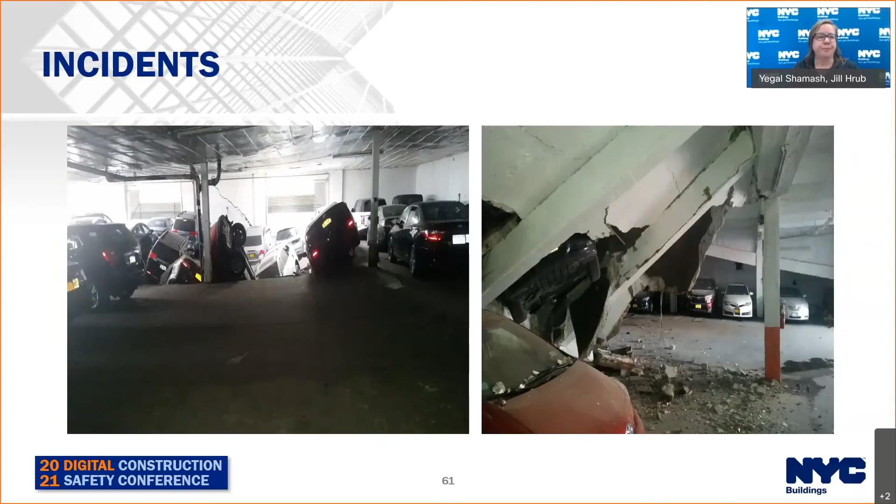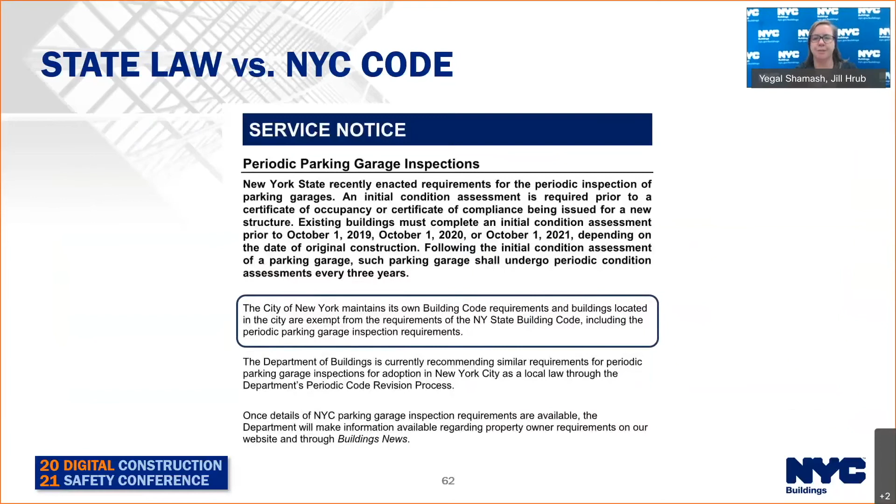So very quickly, state law versus New York City code. This was the service notice we issued right after the state law came out, basically saying that the city of New York maintains its own building requirements, don't worry about the state. And we still get calls, people saying, wait, what about the state law, do we have to do that? And we're like, just hold on, don't worry, we'll have you do something. We'll get there eventually. So then what is going to be in the code?

Condition assessments every 6 years, right? So our thinking was, the state law is every 3 years. We don't think our parking structures are as aggressively attacked as they are upstate. We have less snow, they're maybe not used as much, and more often than not, they're not open to the elements like those open parking structures are.

But yeah, it needs to be performed by an engineer, a professional engineer. And we also want to see an annual observation checklist, which we're going to get into more in the rule. That's basically where you have either the garage attendant or the building superintendent, it doesn't need to be an engineer, but the engineer needs to develop the list and say, keep an eye on this, keep an eye on that, so on and so forth.

And then that annual observation checklist is going to need to be a part of the report. So that observation needs to be performed annually, the actual condition assessment every 6 years. And also that observation doesn't need to be filed with us, but we will want to see it, like if something happens, we're going to ask for it. And obviously, as always, whether it's during the actual 6-year condition assessment, the annual observation, or any time in between, if anybody notices anything, an unsafe condition, notify us immediately.

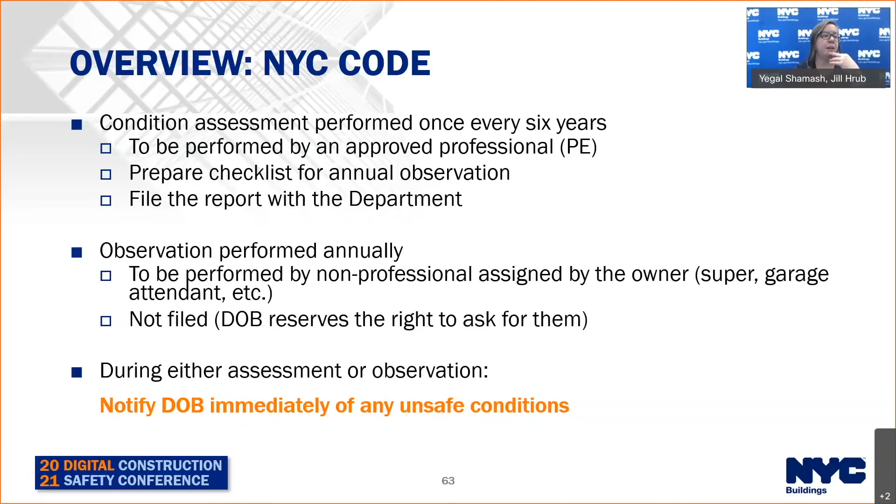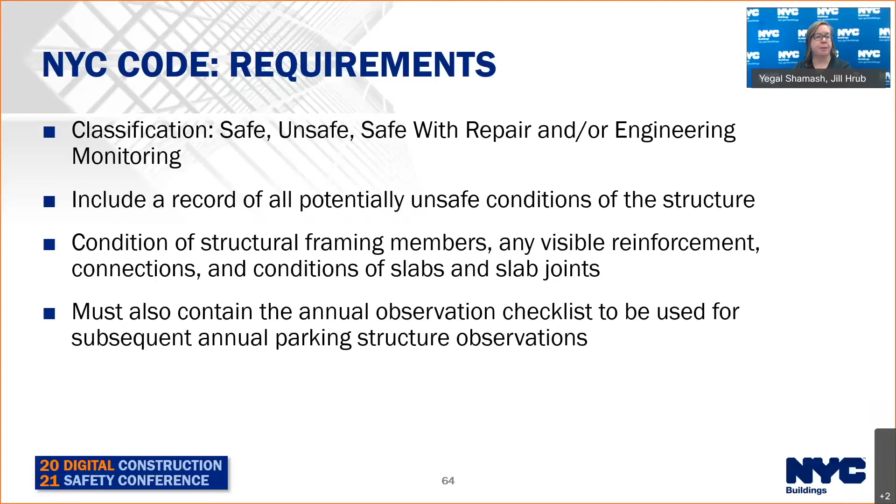So similar to retaining walls and the facades unit, safe with repair and/or engineering monitoring. What is the program? Again, we want to know what are you specifically looking at, not just 'needs to be monitored.' Like, nice, I need to monitor my bottle of water, you know what I mean? We want to see what is going into that monitoring program. Is there crack monitors, survey every 6 months? What does that program look like? And then again, the stability analysis, what is the factor of safety? We want to see some actual numbers.

And then similar to unsafe, protect the public. If there's an area of a slab that is crumbling that you think is unsafe, cordon off the area above and below. In parking garages, that's generally pretty easy. Notify us and then repair the condition.

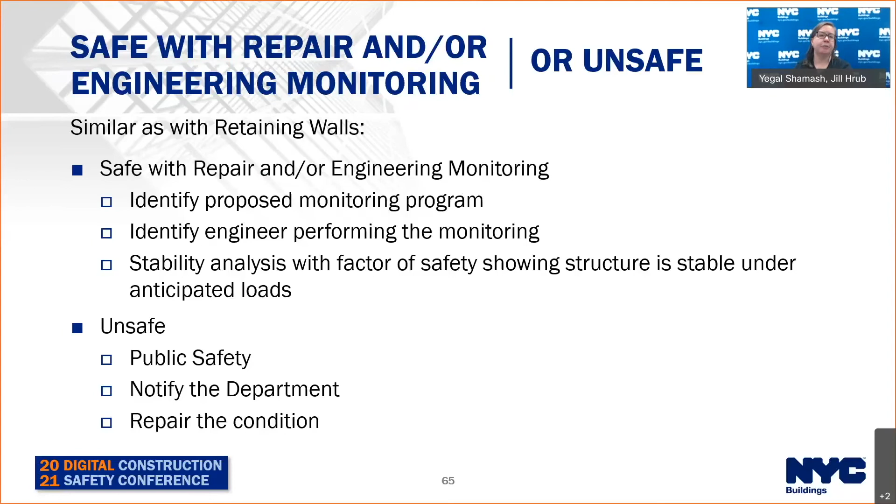So yeah, the code, like I said, is being reviewed by our friends across the street. We're expecting it to be published within a year. I think there will be a provision for parking structure evaluation. However, we are developing the rule, and the rule is going to go into effect January 1st, 2022. So we are going to open up, you can file your first parking structure report on January 1st. You will have 2 years. We're still determining how exactly the subcycles are going to break out, but it will be 2 years. So the first deadline won't be until January 1st, 2024.

And probably if we do get filings in those first few months, they will be manual, similar to retaining walls, but it is being developed in DOB Now, that module. It'll be in DOB Now Safety, similar to facades. And we're expecting that by summer 2022.

As I mentioned, there's going to be two subcycles broken down by borough. I have two more slides, just contact information. Again, you don't need to feverishly scribble this down, these presentations will be available on the building's website. I think I've actually given Antonio two minutes extra because I talked so fast. So he will present to you now about elevators and boilers.

Just a heads up, Yegal and I are lucky in that we can work in tandem and answer your questions because we both kind of cover the same things. Antonio is flying solo, so all of your questions will be answered at the end, because Yegal and I know nothing about boilers or elevators other than the fact that they keep us warm and take us places. So without further ado, Antonio.

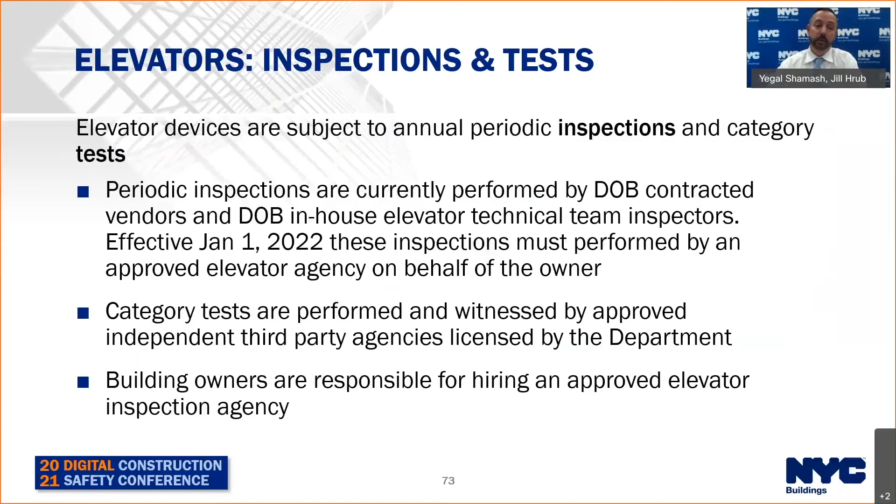Also for elevators, building owners are required to have a current maintenance contract with an approved elevator agency, and they must be able to perform the elevator repair work, maintenance, and the replacement. As you know, in DOB, we use a lot of acronyms. When you hear the phrase MCP, it's a maintenance control program. It must adhere to the protocols specified by the elevator manufacturer. Similar to how everyone drives a different car for the most part, these devices have different protocols as well.

So you want to make sure that that MCP is available, and also the maintenance log, similar to how you're going to go and get your car oil changed every so often, depending on the type of oil, etc. We also want that log to be kept, so that if the MCP requires a certain amount of maintenance on whether it's ropes or whatever, we want to make sure that it's performed at the correct intervals.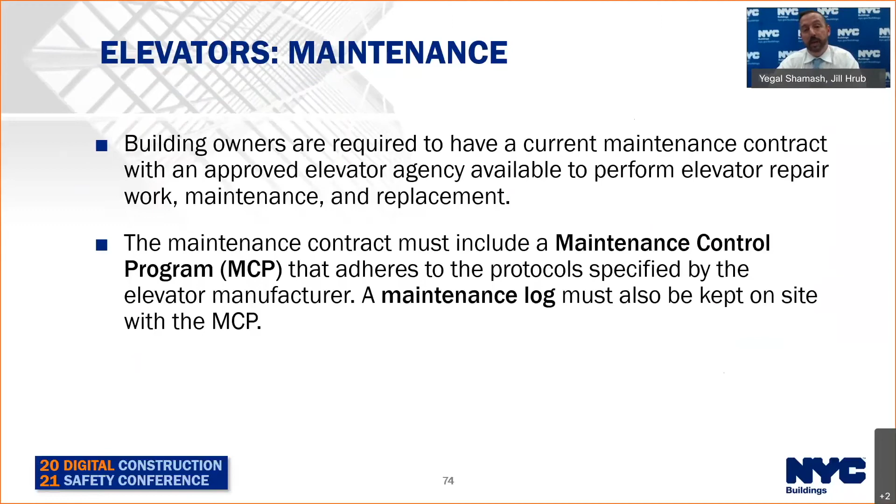Now, we just want to go into the elevator device types. Everyone commonly uses a passenger elevator, but there are more than one type of elevator. We have passenger elevators, freight elevators, sidewalk elevators, escalators, several types of accessibility lifts, dumbwaiters, material lifts, man lifts, and moving walk.

One other note too, accessibility lifts and dumbwaiters that are located in private residence, 1 to 2 family dwellings, are not required to file the report, but they are required to do the inspection and to maintain a log. And they must keep that on record. If we ever go there, you need to provide us that on demand.

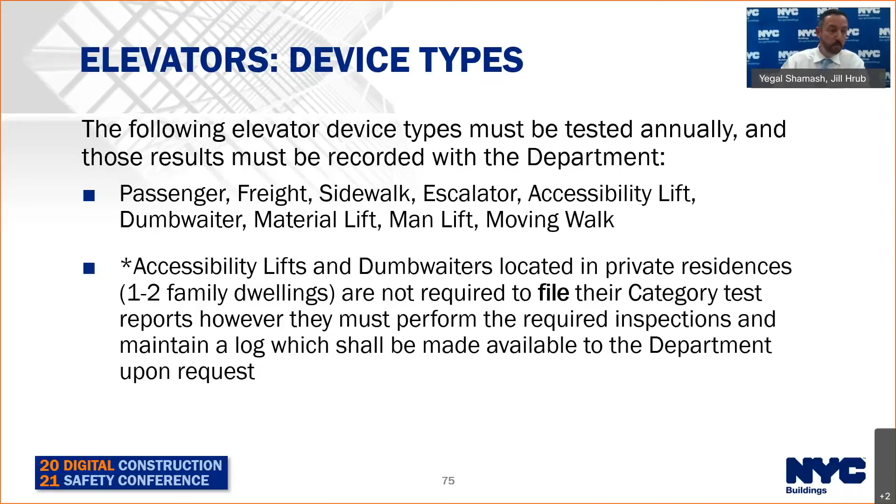Just to go into some of the lingo, elevator sign off, right? You can't just put in an elevator and decide that, oh, it's good, I'm going to start running the elevator because it's completed, the work is completed. When we talk about the lingo for elevators, we refer to it as a final certificate, a certificate issued by the department authorizing the operation of an elevator following a satisfactory acceptance test.

Now, reporting on new installations is required the calendar year following a DOB test result of final issued. So let's say in January of 2021, the work was completed, you request an inspection, DOB goes out there, and we approve the device to be put into operation. You don't have to file in 2021, but you must file in 2022.

This doesn't mean you can't file in 2021. You may absolutely decide that, hey, September, October, I just want to have a look at it and file the report anyway, even though I'm not mandated to the first year. That's absolutely allowable.

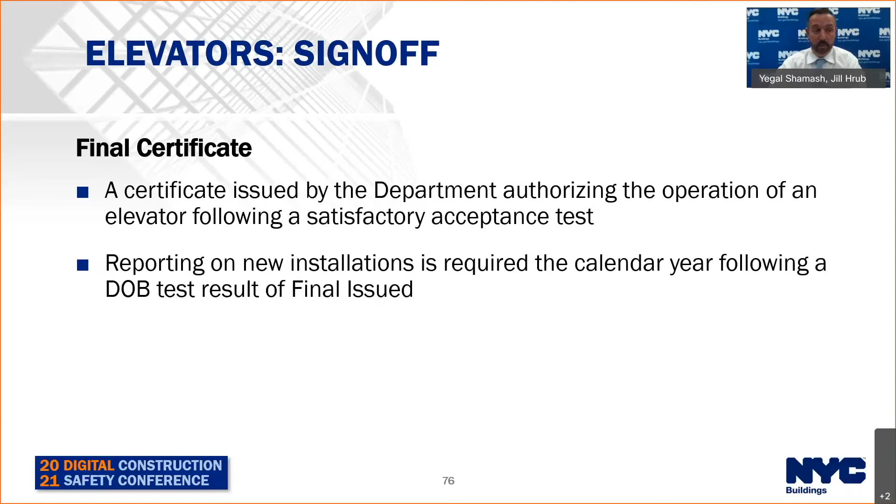So going into the reporting requirements and the upcoming changes. The reason for the change is because of many aspects.

One, we want more timely reporting. Two, we've adapted into this new electronic system where it's no longer archaic like in the past, where we'd literally accept stacks and stacks of paper filings annually. For elevators, we would literally get about 130,000 paper reports to keep track of, data enter, store, etc. Now that it's all online, it makes it much simpler, and we are getting these filings.

We get approximately 10,000 elevator filings per month. The initial filings are often referred to as the ELV3. Current practice, they must be submitted within 60 days of the date of inspection. So if you got the inspection done in January, you have approximately 2 months to give us those results.

Moving forward, ideally effective 2022, we're expecting everything to go through smoothly. That's going to now be reduced to 21 days. So you're going down from 60 days to 21 days. However, these are all digital submissions for elevators.

Currently, there are 5 parties associated with the filing that must go in and at least perform one function, whether it's just an attestation piece. We have the performing agency director or co-director, performing inspector, witnessing director, co-director, and the witnessing inspector, plus the owner. There are talks of potentially reducing that so that it's just the performing and witnessing directors and the owner, to make this transition a little more seamless and to be able to accommodate that reduced reporting period.

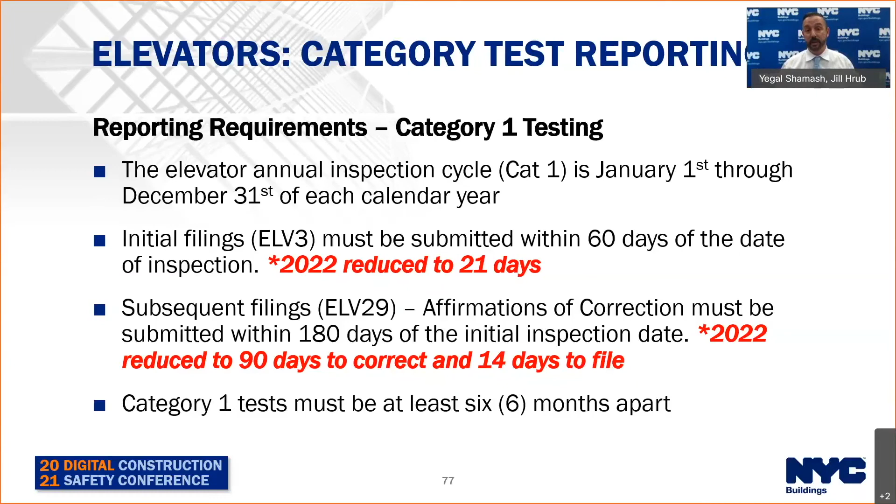We'd like to keep those staggered. These devices are moving constantly, and we would prefer to have them on a staggered basis, similar to how you would go out there and take care of your teeth. You don't want to go to the dentist once a year. Go there often and do preventative maintenance to keep these devices safe and running and to keep the passengers safe.

As far as periodic inspections, I'll go into today's world and also tomorrow's world. In today's world, we have vendors that go out there and do these inspections on our behalf, and they will input those results to us. They'll upload those results, and we'll in turn report those, and you can find those on BIS Web. Alternatively, our inspectors go out and perform the inspections, and they will be inspection ready.

Moving forward next year, similar to how the Cat 1 tests are reported, these periodic inspections will have to be done by the elevator agencies, and they will have to report those results to us in DOB Now. The initial filings will have to be submitted within 14 days of the date of the inspection. So pretty simple: you did your inspection on Jan 1, by Jan 14 or Jan 15 you should get that report to us.

Subsequent filings for these periodic inspections, the affirmations of correction, must be submitted within 104 days in total—90 days to correct and 14 days to file. Unlike the testing, this is more of a visual report.

You don't have extensions on this piece. You have extensions on the category test, but not on the periodic inspections. However, this is changing, and there are many benefits to this. For example, right now these are uncoordinated inspections for the most part, and the inspectors show up unannounced. They may not have that gap in time between a Cat 1 test and a periodic inspection. But now we don't have to worry about no access, which is another huge benefit.

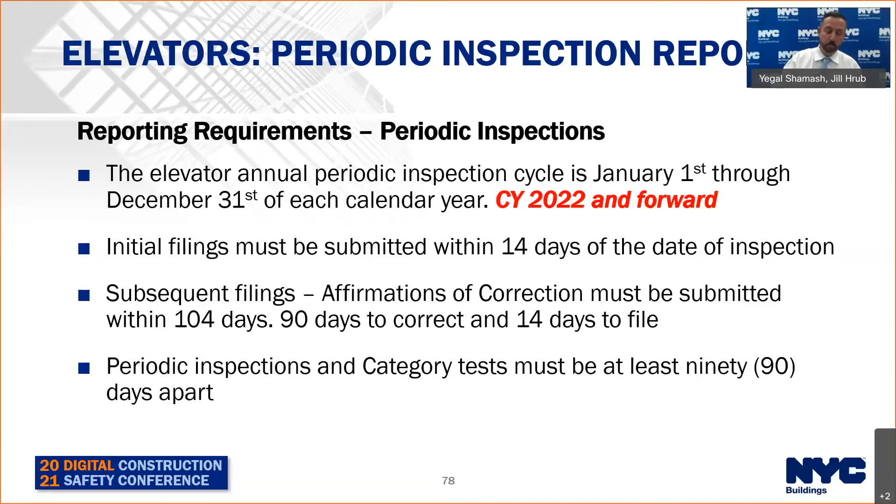As far as Cat 5 tests go, Cat 5 is every 5 years. The definition seems simple, although in the past there was a little bit of leniency in the interpretation. Now there is not - it is being followed to the letter of the law. They shall be performed within 5 years from the month of issuance of a final certificate for a new elevator. So we'll pause right there.

Brand new elevator just got signed off in January 2021 - you have until the end of January 2026 to perform that inspection, and then submit that result to us. This does not mean you wait until February, March, April, May, June of 2026, because in that instance you technically missed your reporting cycle, and you'll be subject to the weightier violation for failure to file your Cat 5 report, which is $5,000 for most buildings. So please remember, it's not a 5-year-and-1-month test. It's a 5-year test, and it should be done at 5 years.

You may do it earlier, but we also don't want you doing these five-year tests every year, because they're kind of labeled as somewhat of a destructive test - they're literally putting wheelbarrows full of weights onto the machine at max capacity and slamming it through to make sure all the safeties and governors work as they're meant to. So it's very important to get it done within the recommended range.

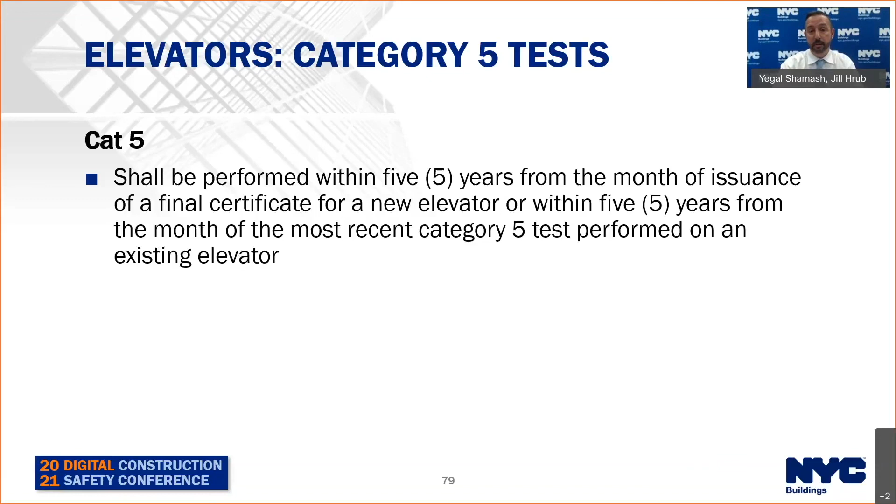As far as civil penalties go for these violations, you'll notice that 1 or 2 residential units in a private residence is not as weighty, but for commercial mixed use - more than 2 residential units - it is $3,000 for failure to file your Cat 1, and $5,000 for failure to file your Cat 5.

As far as the affirmation of correction, similar violations apply - for a private residence, 1 to 2 family, it's $1,000; for commercial, $3,000. As I mentioned before, about 70% of these reports come with defects. If you don't correct those defects and file with us, you may not get hit the first time because you reported initially, but if you don't make the adjustments and fixes and let us know they've been corrected, you will get hit on the back end. We see a significant volume of failure to file the AOC, which is a $3,000 penalty. As far as Cat 5s are concerned, you cannot even file a Cat 5 with defects - everything must be satisfactory when it comes to getting your Cat 5 test done.

Shifting over to boilers. Quickly, before I do shift over to boilers, just to give you an idea - as I mentioned, we have approximately 86,000 elevators out there, and out of those 86,000 elevators, about 70,000 are passenger elevators. Making many trips a day across New York City, I would say probably a good ballpark guess is about 35 million rides per day. So these devices are being used frequently, and they are actually very safe - the safest mode of transportation, not only in New York City, but globally as well.

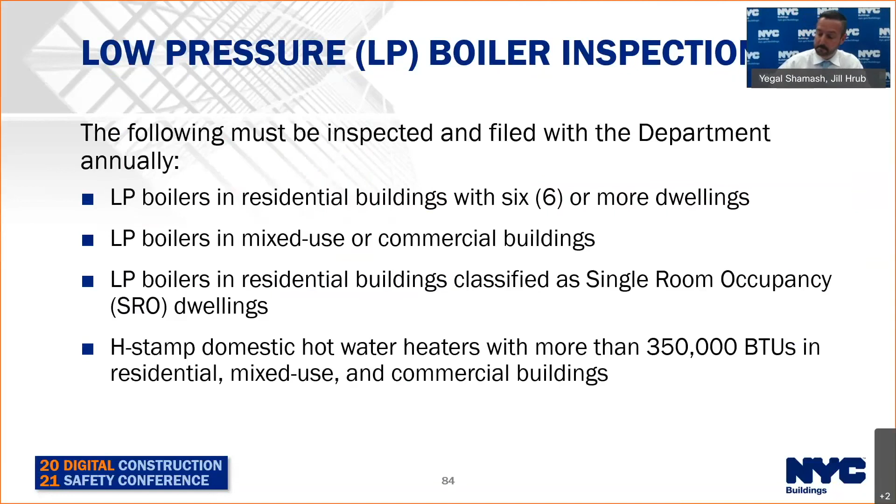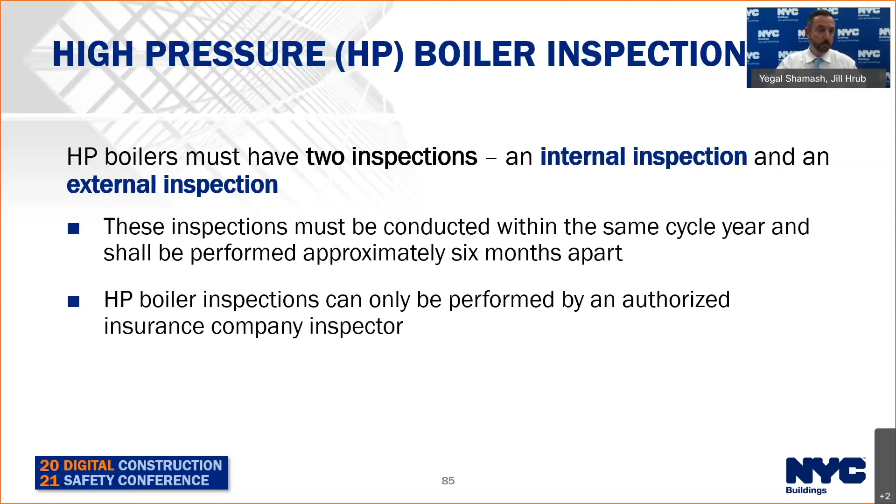Similar cycle, it's Jan 1 through December 31 of each calendar year. So for example, Jan 1 of this year through December 31 of this year would be considered the 2021 cycle. The initial filings currently must be submitted within 45 days of the date of inspection. Moving forward, that 45-day window is going to be reduced to 14 days. Again, everything is electronic - this DOB Now system can be done basically from everywhere, even for the owner's portion. They could be sitting having drinks in the Caribbean and go in and accept their filing. Anywhere you have access to a computer, you can go in and do what you got to do, 24 hours, 7 days a week.

So subsequent filings, the affirmation of correction for boilers must be submitted within 180 days of the initial inspection date, similar to elevators. But moving forward, similar to elevators, that will be reduced to 90 days to correct those defects and 14 days to file. And the annual inspections, just like the category test for elevators, must be at least 6 months apart.

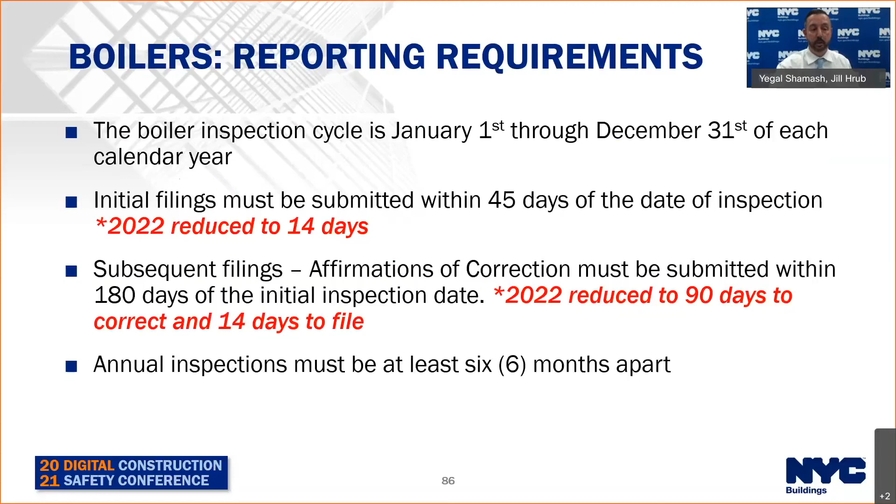Just like elevators, you have to receive DOB approval before you could put this device in. Interestingly enough, we do have a higher rate of failure of first test inspections on boilers versus elevators. New boiler installations and boilers that have undergone replacement must be inspected by the department in order to receive approval for their use and operation. Reporting on new installations is required the calendar year following the first test passed inspection. So same thing, the boiler was signed off in 2021, you don't have to file in 2021 - you may, but the following year if you do not file, you will receive a failure to file violation.

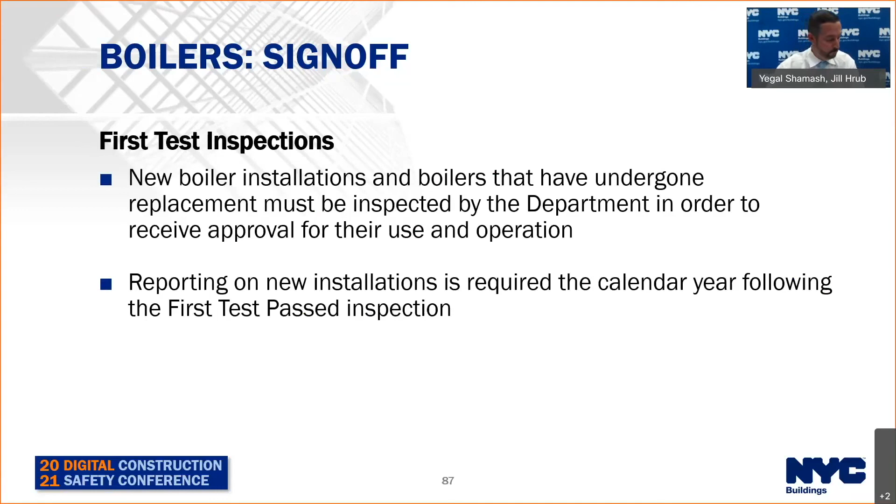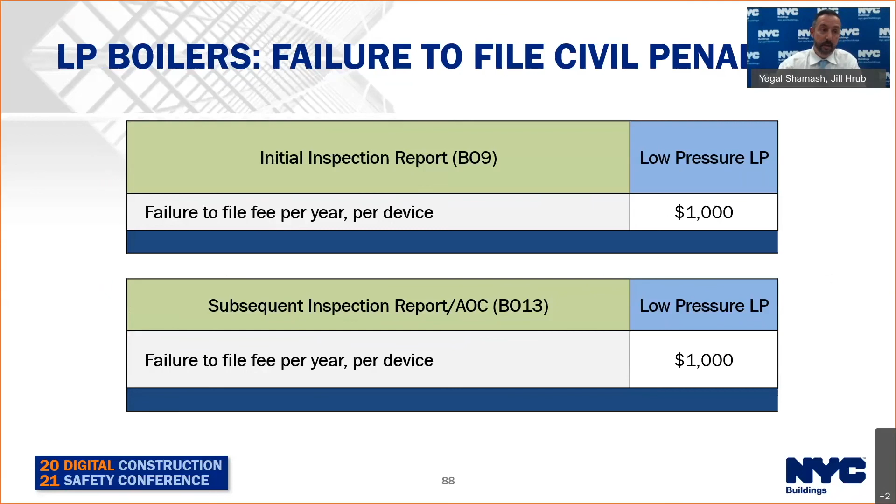As far as boilers go, it's $1,000 per year, per cycle year, per device. Same thing for initial reports, same thing for subsequent reports.

The high pressure is slightly different. As we mentioned earlier, there are 2 inspection types, an internal and an external. If you fail to do both, you'll get $1,000 for failure to file the internal and $1,000 for failure to file the external. So it's very important that you do both of them.

What else did I want to mention? As far as DOB Now overall, please make sure, as I mentioned, these fines are levied against the owner. It's very important through all of these launches that I've sat through, and I've sat through at least 4 of them at this point. We get some pushback as far as requiring the owner to register an e-filing and have their contact information. I've heard all the excuses in the world - they're not computer savvy, or the ownership is always changing, or they manage too many buildings. We need that ownership information, and it's important as an owner to want that, right?

If you own a building, you want to make sure that you paid your boiler inspector or elevator company to file the report. This gives you an email each time throughout the steps of the process to know that you've filed, so you don't have to worry about that violation because you know you have it, and you also have proof of filing. So that's very important, to have the right names.

Also, it's very important as the applicant or the company, please give us legitimate owners. I've had some very funny ones - let's say you're Super Mario's Plumbing, we don't want every owner to be Luigi or Yoshi or a made-up name. I actually had one person where every owner was listed as 'Front Desk.' It's very easy to find because we can run these reports, and we know that not every owner is Front Desk. Everything is digital, everything is trackable, and we want the right owners. We want to make sure everybody's safe, and that the burden falls properly on the owners. So please protect the owners by reaching out to them and getting the correct information.

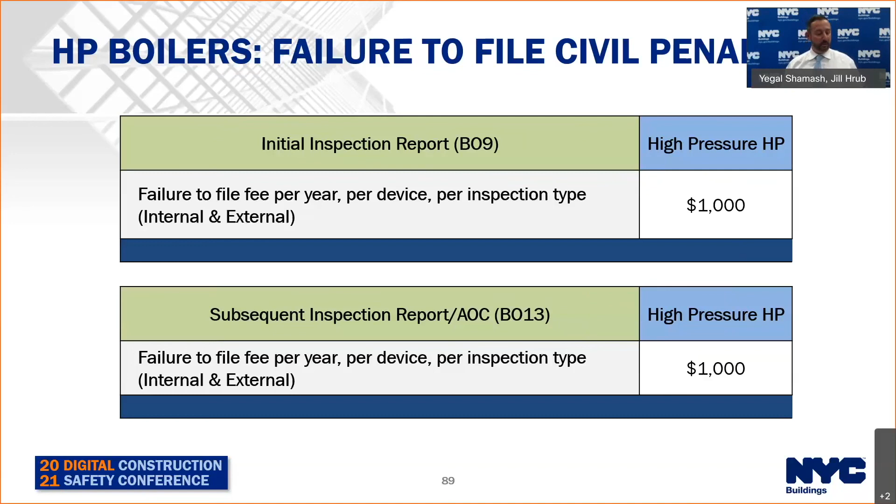And that's it. I'd like to conclude with one interesting tidbit that was exciting to me, and to assuage any fears out there - elevators seem to get in the limelight anytime there's a minor or major incident, which of course we look to avoid at all costs. It seems the reporting gets out of control. However, they are very safe - the safest mode of transportation not only across New York City but across the world. The fun fact I'd like to leave you with is that if you took all the elevators worldwide together, they would carry the equivalent of the Earth's population every 3 days. And that's all I've got - thank you for your time.